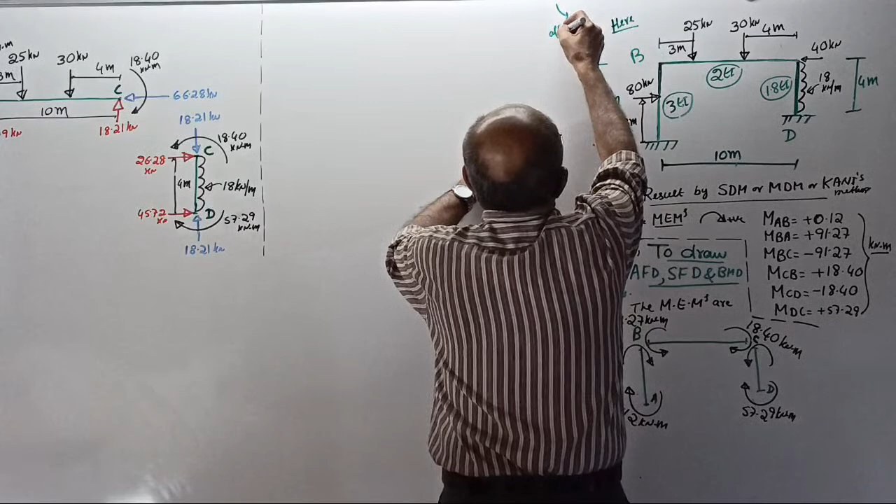See, don't see this side. This is a result I wrote, prepared earlier to save time. You never bother this side now. We are actually here, see, we are here. That is, after analyzing the frame by SD method, MD method and Kani's method, everywhere finally we got member end moments.

Member end moments. Then I wrote what? Then I wrote go to where? If you remember, after getting the end moments, then I wrote what? Go to. What is the usual statement? After getting the member end moment, SD method over, MD method over, Kani's over. Methods are over. Then I write what? Go to. If you remember, after completing every method, what I will write? Moments are over. Go to where? You are not responding. Every time I used to write, different methods are used.

Method will give only member end moments, that's all. Then I told what? Go to. Nodi, you are not answering. You are writing message and deleting. Same time you can use for writing message. Go to where? After getting the member end moments. No, I never write, I give a simple language. SFD BMD, what name did I used to give? No, I used to give a name for you. SFD BMD comes there. Okay, you are telling SFD BMD. I used to give a name. See, just to understand, common part.

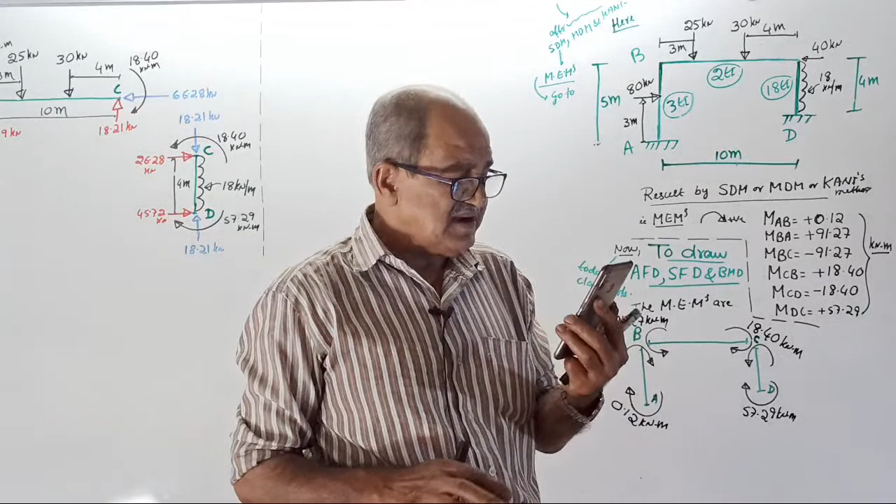You are not following. I used to write, always go to star. Go to star, so our star starts from here. Here, this is not required because already over. This is already over, this is also already over. Okay, start. Now, just to understand.

This is the frame, we that C is missing there. Okay, I don't know why. C. Okay, this is the frame we analyzed by slope deflection method, moment distribution method, and Kani's method. Each and every method will give you final member end moments: MAB, MBA, MBC, MCB, MCD, and MDC. Yes, this is the result. Tell me, this is the result by which method? Result by slope deflection method or moment distribution method or Kani's method.

All the three methods we got same answer. Okay, now up to here, see, this is already over. Now to draw axial force diagram, actually SFD BMD, we will also draw axial force diagram for this frame. That is, today's class starts from here. Now, why I wrote the question once again? Because when I want to find reaction, I should see the frame. If I write a free body, then I would keep on asking you, what is the length, what is the load, etc.

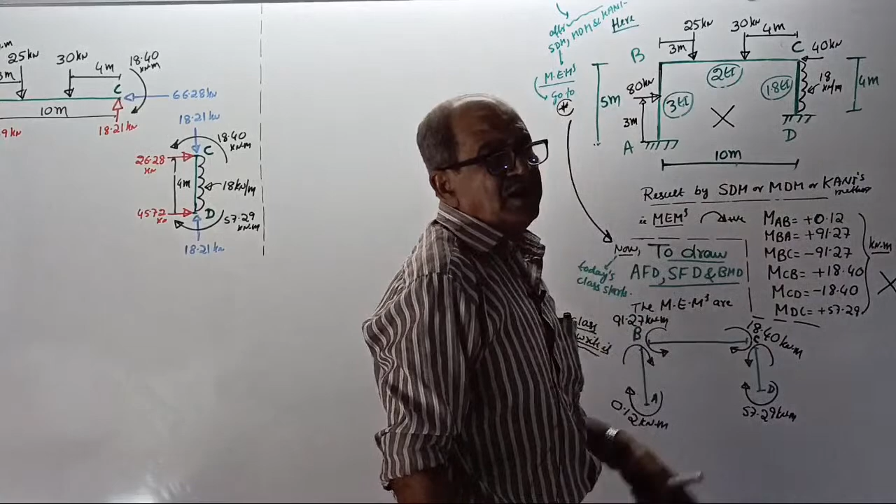I want to understand, I got a confusion for axial force diagram, shear force diagram, bending moment diagram. Those methods are, he may tell, I am expert. Okay, if you are expert, use your expertness and analyze and get the moments. Okay, now clear? Use your expert knowledge and get the moments. Okay, start. Now, nobody can tell, I am not getting the answer. If you are not getting the answer, you have done some mistake.

Okay, now to draw axial force diagram, shear force diagram and BMD, what we will do is, to correct, see, what all I tell you write here. See class, what all I tell you should write if you want to understand. What we will do is, when you go to star part, see our star starts from here. Here, to understand correctly, you draw a line diagram. One member here, small gap, member here and member here, and enter whatever moments you got.

Remember, all these moments are based on sign convention, clockwise. I told you, whatever I tell you should write. Tomorrow you tell, sir, you wrote anticlockwise. Earlier class you told unknown should be taken clockwise, but you wrote anticlockwise. Now it is not unknown. That's why I told, these moments we got by SD, MD and Kani. Now one more thing, completely forget. Now I do not know what is SD method.

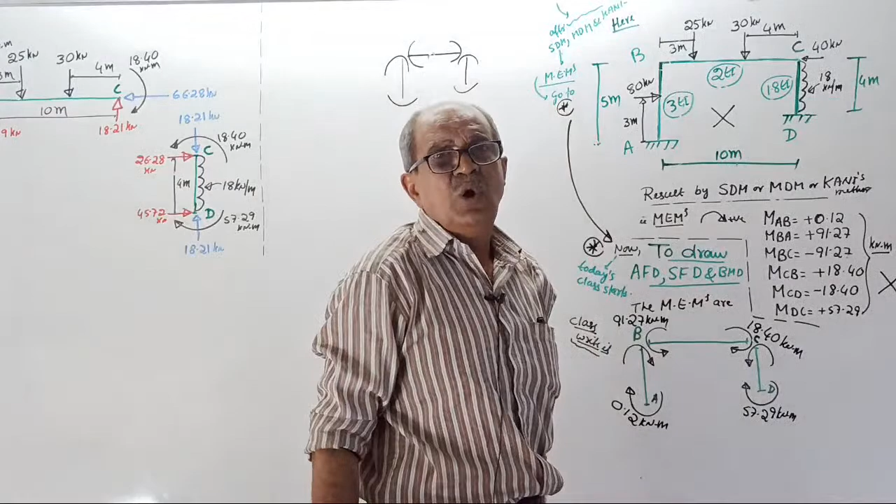I do not know what is MD method or Kani's method. I know only one thing: each and every member will have member end moments, because of fixed supports and rigid joints having moments. Suppose someone gives me these end moments for each and every member. He tells me: now draw the axial force diagram, shear force diagram, and bending moment diagram.

Okay, done. Now these moments we got are based on sign convention, clockwise positive. Therefore, if you write the value as it is with sign, you have to write it as I told in class. If confusion comes, you are responsible. When you enter the moment with this sign convention, you want to write plus 0.12, plus 91.27, minus 91.27, plus 18.4, minus 18.4, plus 57.29 - then in what direction should those moments be entered?

Tell me, if you are going to enter the moments with sign, in what direction should those moments be entered? I will not tell again and again. This I told you earlier. If you are going to enter the moments with sign convention, then compulsorily you have to enter those moments in the clockwise direction. Why? Because as per sign convention, clockwise is positive.

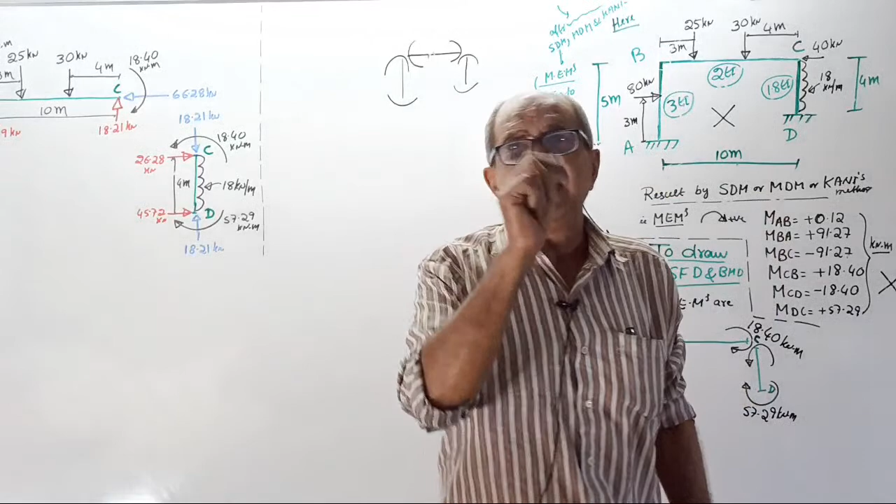Suppose you want to write 91.27, clockwise positive, but negative came. Suppose I want to enter only 91.27 without sign, only the actual direction - no sign, but actual direction. Then this moment and this moment should be entered in what direction? If I am writing only 91.27, no minus sign, then in what direction do I enter 91.27? I will not repeat.

Then for this minus 91.27, if I want to write only 91.27, I should enter it in anti-clockwise direction, no plus minus. Tell me, fully clear? Full clear first. Full clear or not?

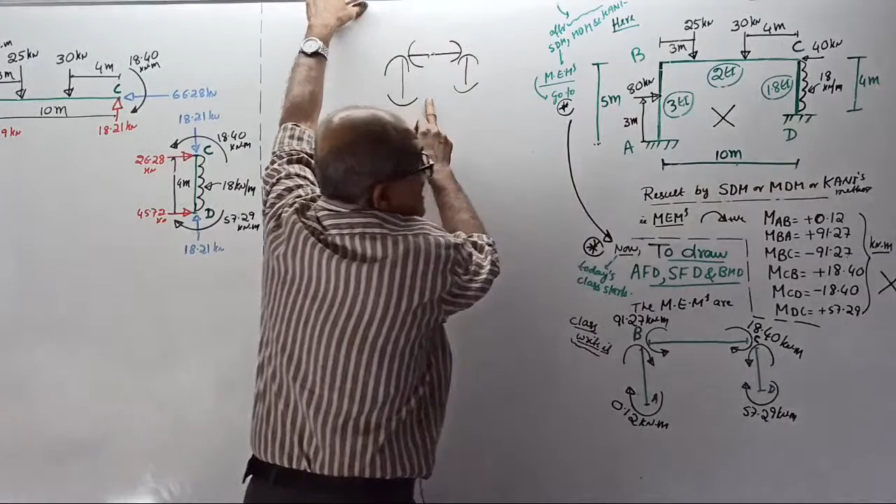This is a major problem for more than 95% of people. I will tell once again: if you are using a sign convention and got the values, then if you are going to enter the result with sign, you should enter it in the direction as per sign convention. Or if you do not want to enter the value with sign, if you want to only enter the numerical value in the actual direction, then anything you got positive, you write the moment without sign in the same direction as sign convention. Anywhere you got negative, you enter the numerical value in a direction opposite to sign convention, without sign.

Clear? This is the last statement, in future I will not tell this again. Go through this 100 times. Clear means okay, second time I told you - later you should not say you weren't told. People who understand should go through my class fully, it's only useful if you do that.

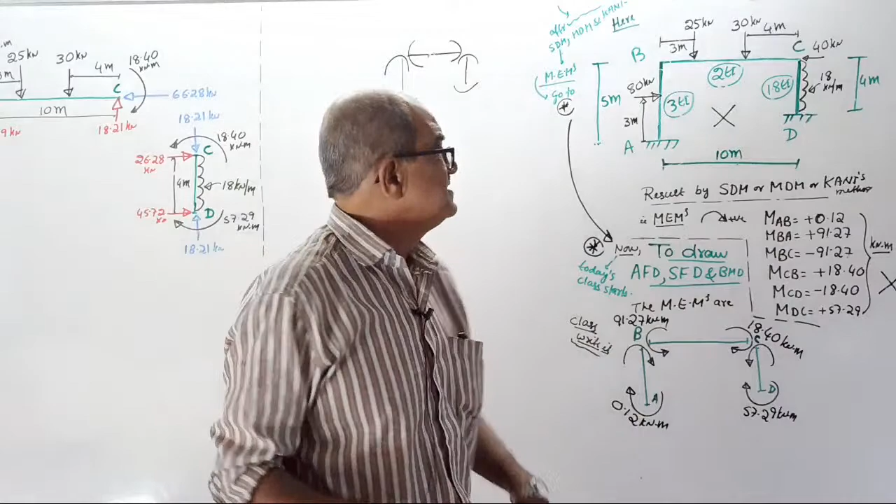Okay, start. Now enter the moment. I entered here - see: plus 0.12, clockwise 0.12. Plus 91.27, clockwise 91.27. Minus 91.27, anti-clockwise 91.27. Plus 18.4, clockwise 18.4. Minus 18.4, anti-clockwise 18.4. Plus 57.29, clockwise 57.29. These are the member end moments. Write a note here: all are in actual directions, no sign, nothing.

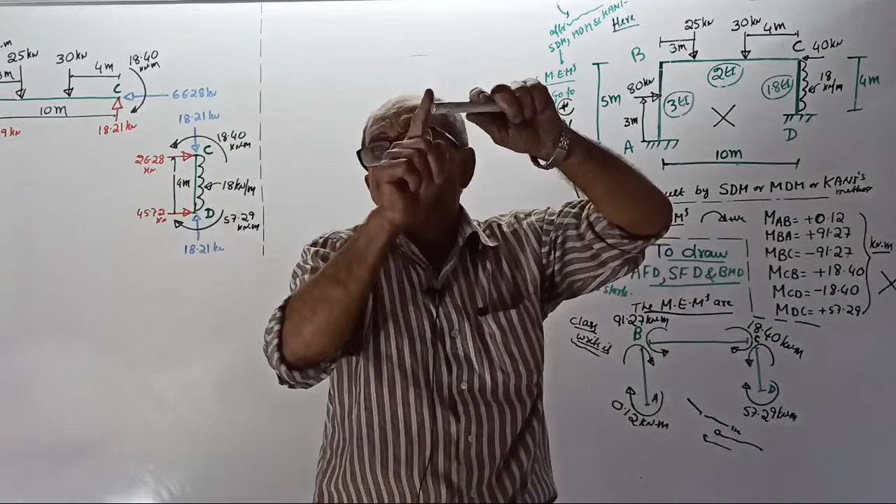Okay, start. Now, to draw the axial force diagram, you require the force along the member. To draw the shear force diagram, you require the forces perpendicular to the member. To draw the bending moment diagram, you want moments and also forces perpendicular to the member. Clear? See correctly, I am telling only one example.

If you do it by software, you get the result. If you want to draw the axial force diagram, you require the forces along the member. If it is a vertical member, I want forces along the member, vertical forces - it will create compression or tension. If I want beam BC, I want along the member: this way is tension, this way is compression.

Same way for CD. If you want the shear force diagram for the beam, you require forces perpendicular to the member. If you want the column shear force diagram, you require this way, horizontal forces. Same here. To draw the bending moment diagram, you require the same as the shear force diagram plus extra moments are required. Clear? Fast, clear? Make this note 10 times.

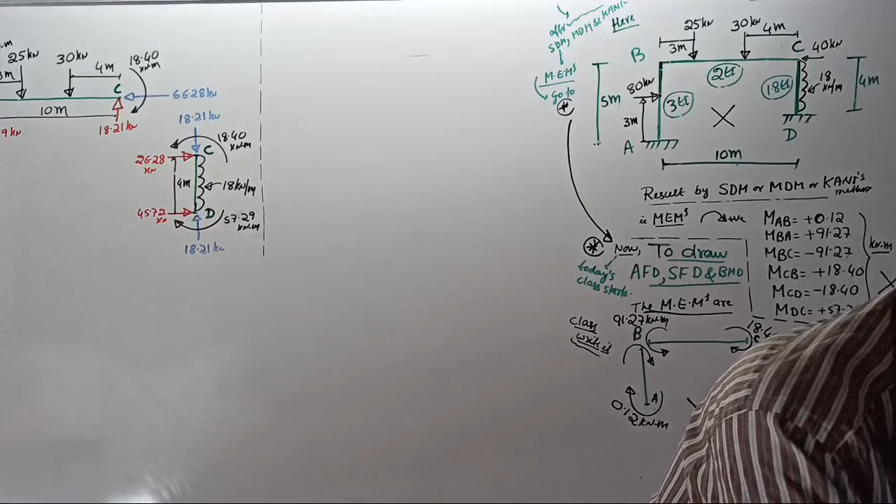You are not saying clear. Okay, clear. See, not answering? I will tell it systematically now. Don't worry, okay, now see.

If you know the member end moments, remember, when you consider the free body of a member, you can only find what? Tell me - if I write the free body of a member using member end moments, using sigma M = 0, sigma V = 0, or sometimes sigma H = 0, from the equilibrium condition using member end moments, you can find only what? Tell me, using the equilibrium condition, if you write the free body diagram for a member, you can find only which one? Tell me, you can find only what?

Only horizontal force or horizontal reaction or vertical reaction. Tell fast. If you write free body of a member, apply equilibrium condition, you can find only horizontal forces or vertical forces. Fast. Reactions, okay. Horizontal reactions or vertical reactions. Fast answer. You should answer fast.

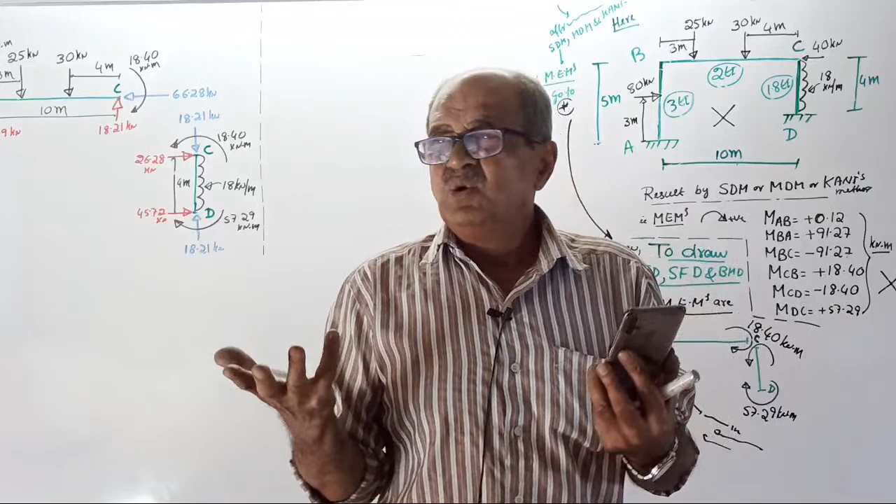Don't delay unnecessary, hours together. See, usual problem, no reply, nothing. Then why am I asking the question? When there is no answer, I have to keep waiting for the answer. Then it will become like last time's class. I may close the class and go. I will record. See, I asked you two times. Third time I cannot ask. Sorry, I asked two times. Third time I can't ask. Sorry, not asking. No, not asking, asked two times.

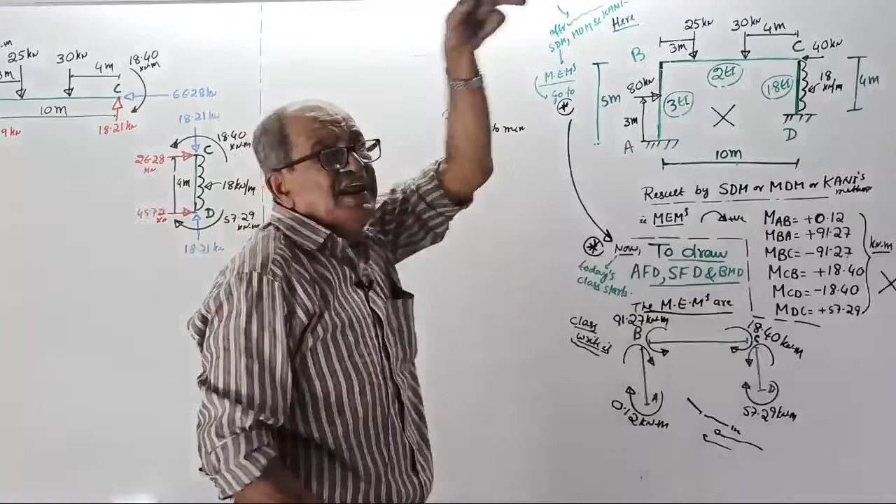Okay, I will tell the answer. If you sketch the free body diagram of any member and you enter the member end moment and reactions for the member, then using equilibrium condition, you can find only reactions normal to member. That is, those reactions which have shearing effect and bending effect. No axial forces. Because if I take a member here, for example, if axial force is here, one reaction here, two unknowns are there. You can't solve it.

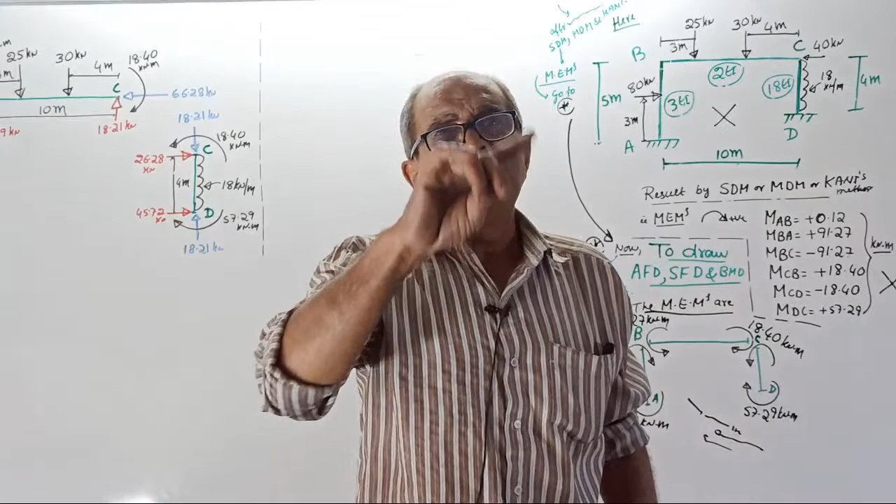So, if you consider free body diagram for a member, you can get the result or reaction which are used for which one? Tell me. Axial force diagram or SFD BMD. By considering free body diagram of each member, what reactions are you getting? You will get those reactions which are used for what? Either axial force diagram or SFD BMD together. Which one? Tell me. Two groups. One is axial force. SFD BMD together, which one? SFD BMD. So, if you want axial force, you require some extra concept, I will tell. So therefore, right here, first what you do is, first consider free body of all 3 members.

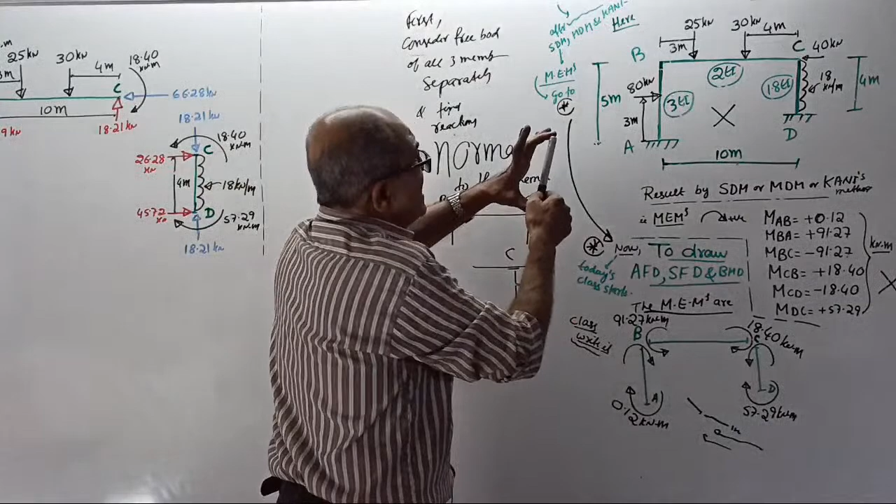Separately, and find what? Reactions normal to those members. That is, if I take the AB member, find this reaction. If I take BC member, find this reaction. If I take CD member, find this reaction. Direction I will tell later. Clear? For AB, this reaction, not axial. Axial will not come. For reaction, I told normal to member. For AB, get this reaction. For BC, get this reaction. CD, get this reaction. Clear?

Fast. Okay, start. First you do it. But remember, direction of reaction, if clear for you, 100% guaranteed, assume in the correct direction. If you are 100% sure, assume correct direction. In case doubt comes, what to do? Direction of reaction, in case doubt comes, what to do? Suppose doubt comes, horizontal reaction, right side or left side. Doubt, don't see SDM, MDM, Kani now.

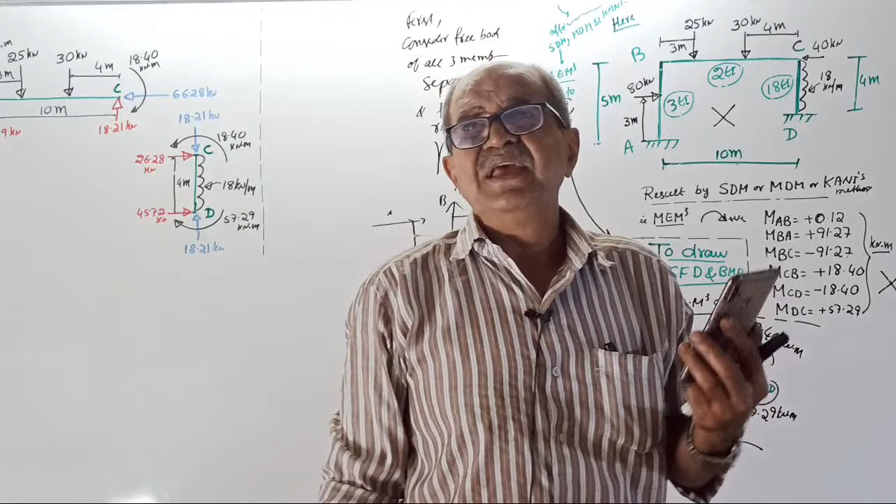You do not know SDM, MDM, Kani. We are actually in engineering mechanics. Remember, we are in engineering mechanics. Tell me, if direction is confusion, what do you do? Tell me what to do. If directions are confusing, suppose you are not able to decide direction. For example, horizontal reaction here. Doubt comes, right side or left side. Doubt comes, what to do?

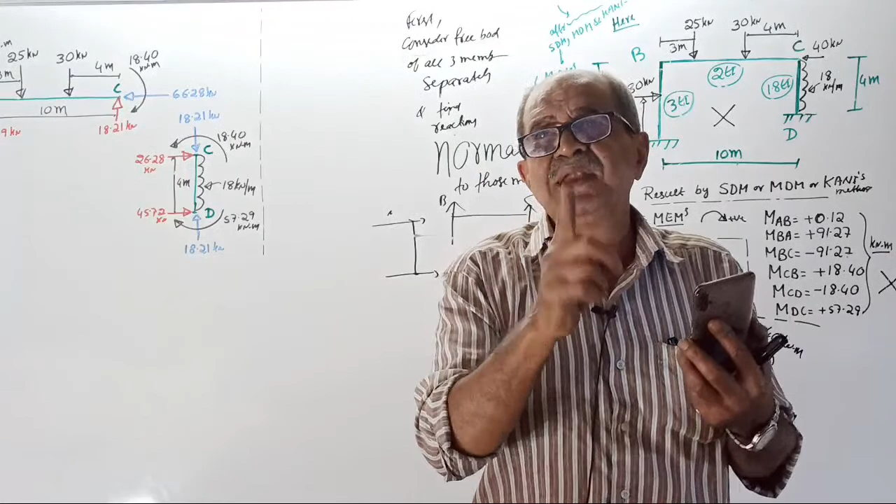Assume some direction. When you solve, use any sign. If it comes positive, assume direction is correct. If it comes negative, assume direction is wrong. So, if you get positive, next time when you go to free body, enter the value in the same direction as assumed. If you get negative, later enter the value without sign but in a direction opposite to the assumed direction. Clear? See, structural engineering has got lot of mathematical concept.

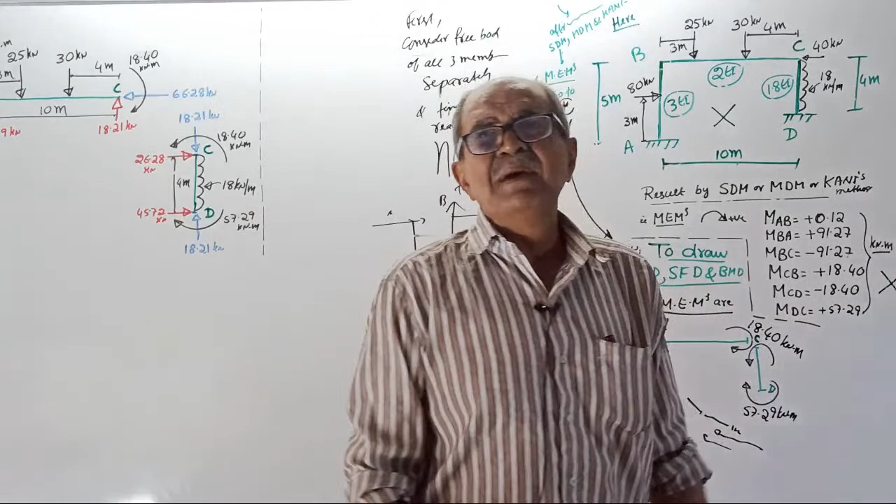Lot of concept, so much of mathematical concept. So many people, I will tell you, it is not 95%. I am guaranteed, if I have to trap someone, I have got confidence. I can trap 99.99999% people, I am sure. Maybe, sorry for having so much confidence. My confidence, if you bring 1,000 people, I am sure 999 people I can trap. Maybe one, okay, he may be equally competent. With him I will tell, oh you got beautiful concept. Sorry, we are friends, I will tell him that way. Sometime I will tell, no more testing you, you got perfect knowledge, therefore we are friends. Leave it, you are not in the group. Others all, I can easily trap. Ask some questions seriously, one after another. See how they will fall to the trap. Okay, start. Not for boosting myself, I told, because it is a reality. It is a reality, do you agree? It is a reality that majority, more than 99.99% got confusion, they are open for trapping. Whether you agree or not, it is a reality. Okay, start, now first step.

Calculation of reactions, normal to members. Very, very important: members for AB, BC and CD.

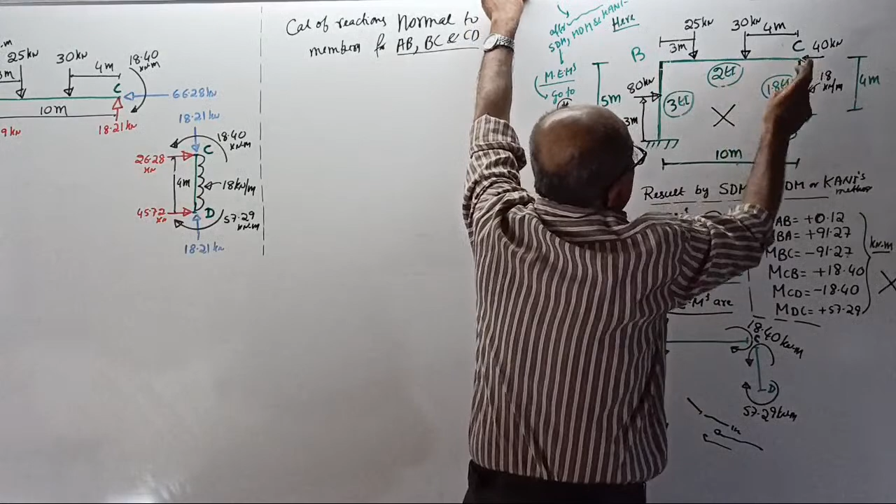Remember, here AB is supported by BC, and BC is supported by AB on one side and by CD on the other. Beam BC is supported left side by column BA, right side by column CD, with contact points B and C. Do you agree?

Okay, start. First I'll consider AB. I'll write the free body for AB. This is A, this is B. There is a point load here of 80 kilonewton at 3 meters from here.

Then further, there is a fixed support. Since the load is going this way, the likely chance is, with assumption, when you apply load here, the reaction will come like this.

HA. You should not take the right side. And if you apply load this way, the likely chance is that reactions are like this: HA and HB. Tell me.

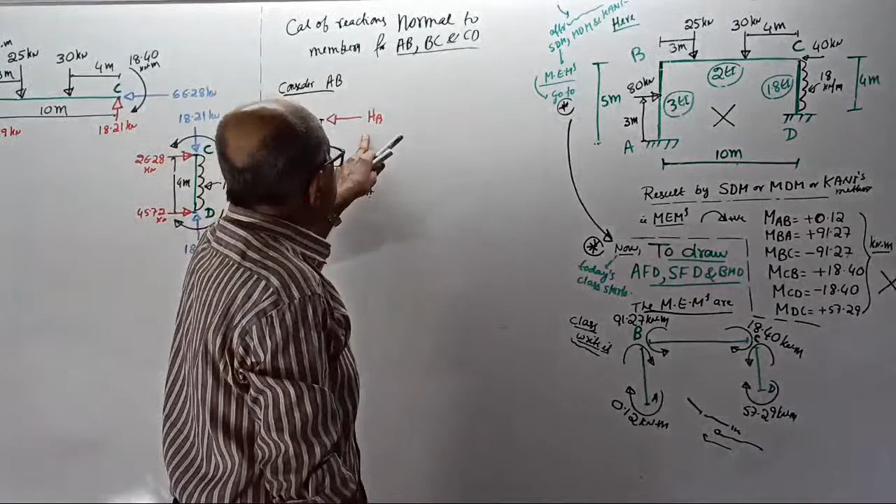This HA is coming from the fixed support. This HB is coming from where? Tell me, from which member is HB coming?

BC. So if you want, I will put H for BC, H for BA, correct? Now I will call it H for BA. Okay, this is HA only.

Now also there are member end moments. Also there will be vertical reactions, but we are not bothered about those now. Most probably the reaction will come like this here, VA, and here from the beam a downward reaction load will come, maybe VBA. You don't worry about it now, because when you take moment, VBA and VA are not there. But very important, moments are there.

At A, clockwise moment of 0.12 kilonewton meter. At B, once again, clockwise moment of 91.27 kilonewton meter.

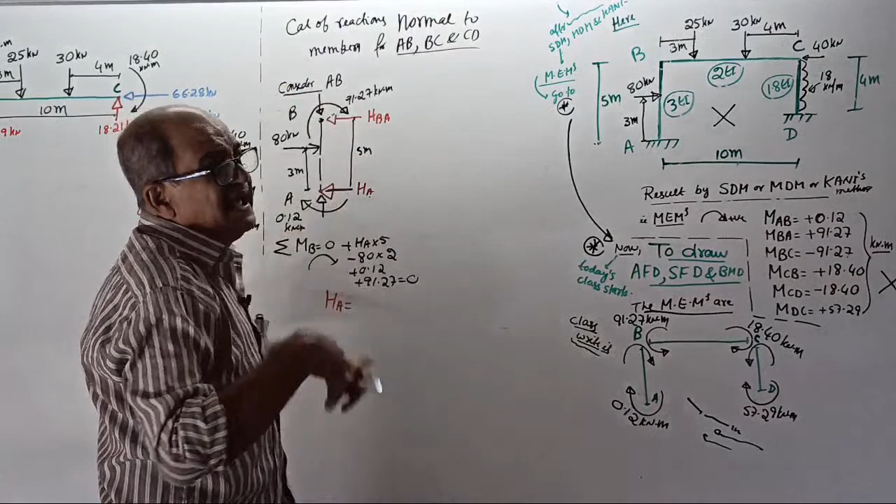Answer: give the answer with sign. Whenever you find something based on sign convention, remember, you always write the answer with sign. Plus 13.72. Congratulations, it is plus 13.72 kilonewton. Okay, then sigma H equal to 0.

Take right side positive. Minus HA, minus HBA, then plus 80, equal to 0. That's all.

You know the value of HA. Substitute for HA and tell me what value of HBA you are getting. Fast, with sign.

Plus the answer, HBA. Reaction at B for the BA member.

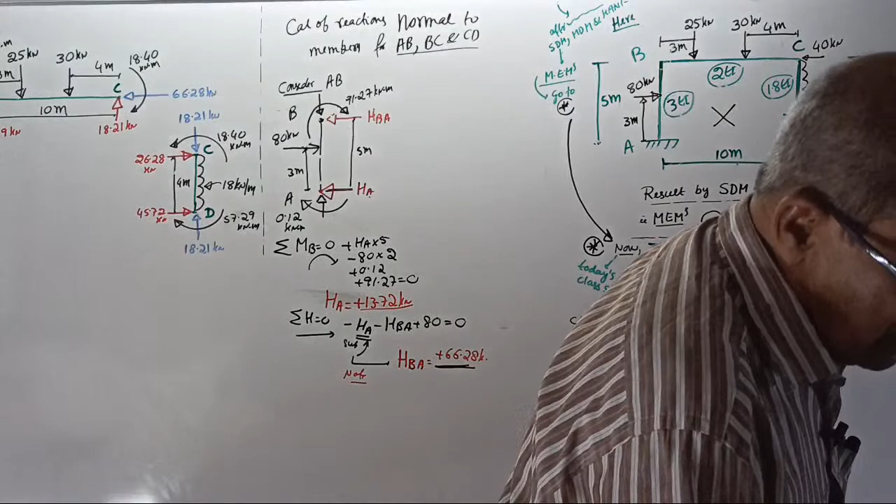Fast, clear or not? Clear. By chance, if you get a negative sign anywhere, then when I enter it later, I will enter it without the sign, in a direction opposite to the assumed direction. Okay, next, consider BC.

Consider BC. BC is here. There is a point load of 25 kilonewton, one more point load of 30 kilonewton, and there is a reaction here, and a reaction here. This is reaction at point B, this is C. Reaction at B is the vertical reaction for BC, vertical reaction at C for CB. Then there will be some horizontal reaction.

We are not interested, because you cannot get it. If you apply sigma m, sigma v, you get it. Suppose you apply sigma h, two unknowns are there. Axial force you have to get using a trick later. So these are not required for us at this time. Anyway, when you take moment, it has no effect. There is an anti-clockwise moment of 91.27 kilonewton meter, a clockwise moment of 18.40 kilonewton meter. Remember that 40 kilonewton is acting externally from outside, don't consider it. Okay, start.

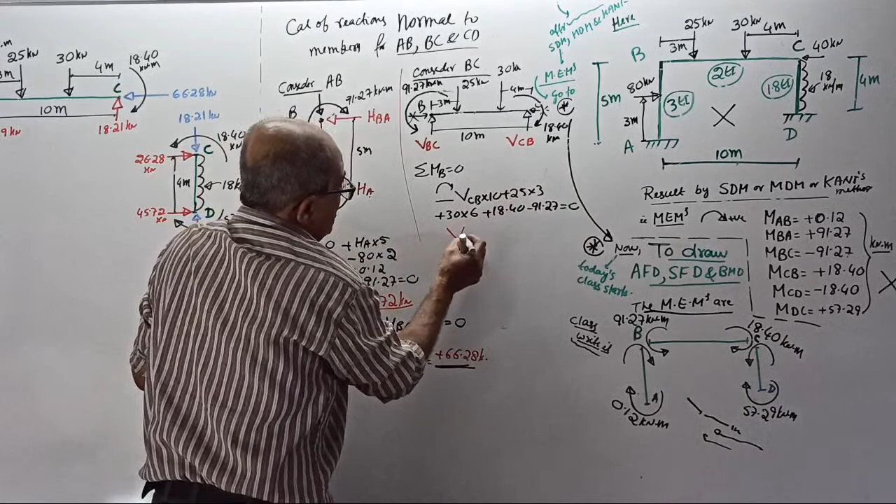Length of member is 10 meter. This is 3 meter, this is 4 meter. So if I take moment about B, clockwise positive, I will get minus vertical reaction VCB into 10, plus 25 into 3, plus 30 into 6, then plus 18.4 minus 91.27 equal to 0. Tell me what is the value of VCB you will get, with sign, in kilonewton.

Answer: I told you, when you apply sigma m0, sigma v0, you can find only the reaction normal to the member. For a column, you can get horizontal reaction. For a beam, you will get vertical reaction. Answer: VCB.

A little past, I want second decimal accuracy, which is sufficient. So therefore, lastly, while balancing, some 0.01 difference is not a problem. Plus 18.21. Thank you, plus 18.21.

Sigma V equal to 0, upward positive. You get plus VBC plus VCB minus 25 minus 30 equal to 0. You know the VCB value, therefore you get the value of VBC. Answer, fast, plus.

We get what? You get VBC. VBC will come plus 36.79 kilonewton. Correct or not? Plus 36.79, correct answer? Tell me, correct or not?

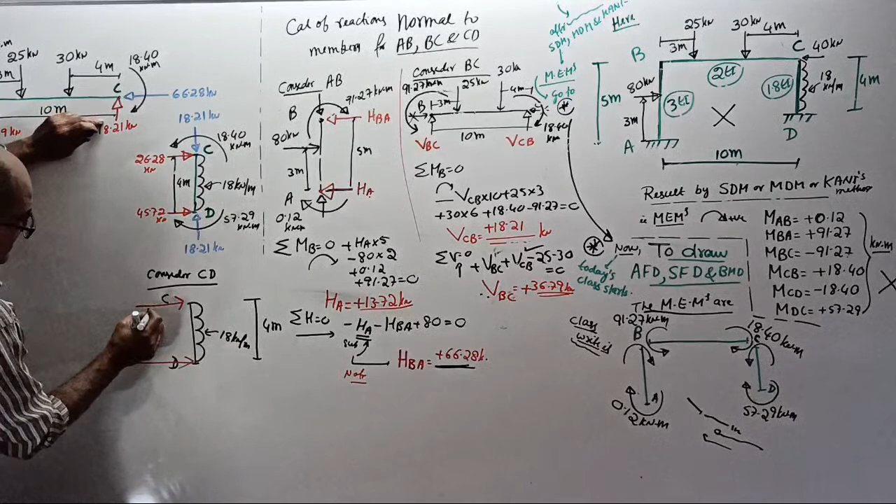Now, because the load is this way, every chance is that horizontal reaction will be like this. I will assume like this: HC and HD, this is HCD. SCD, okay. Now there will be a vertical reaction, we don't require it. Then there is a moment here, anti-clockwise, of 18.40 kilonewton meter, a clockwise moment here of 57.29 kilonewton meter.

Okay, now sigma m about any point will do. I will take moment about C. About C equal to 0, take clockwise positive: minus HD into 4, plus 18 into 4 is the total load into 4 by 2 clockwise, that's all, plus 57.29 minus 18.40 equal to 0. You get the value of HD.

Tell the answer, you get the value of HD in kilonewton. Fast, you get the value of HD in kilonewton. A little fast you have to give the answer, you are wasting a lot of time. That's why now in later courses, all basic courses, I decided it's better to go for recording only, where time is not wasted. Live class means what? You are participating, but a lot of time is wasted because there is no response.

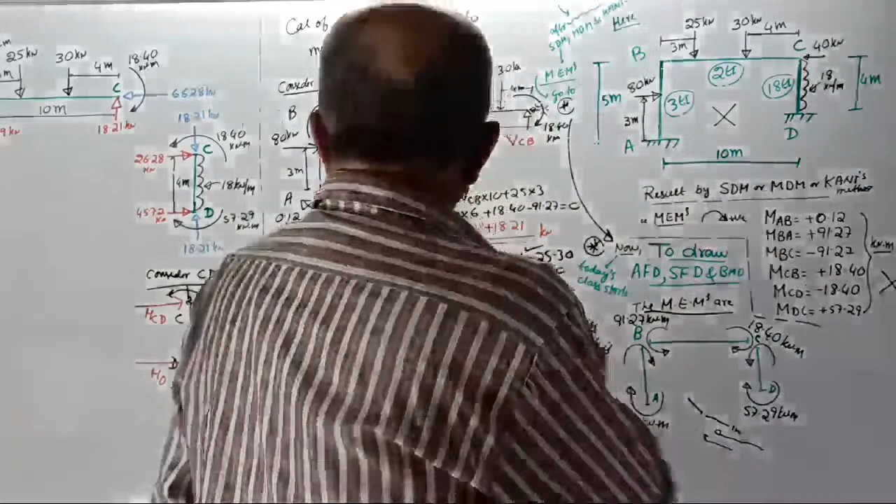When I write everything: plus 45.72, plus 45.72 kilonewton. Okay, then make sigma h equal to 0, not sigma v.

Right side positive, then plus HD plus HCD minus 18 into 4, the total load, equal to 0. Therefore, you get the value of HCD. Oh, last answer, over. Answer: now I will tell you how to write the free body diagram. Answer, HCD.

Calculations over. Now only tricks are there. If you tell HCD, my work is over.

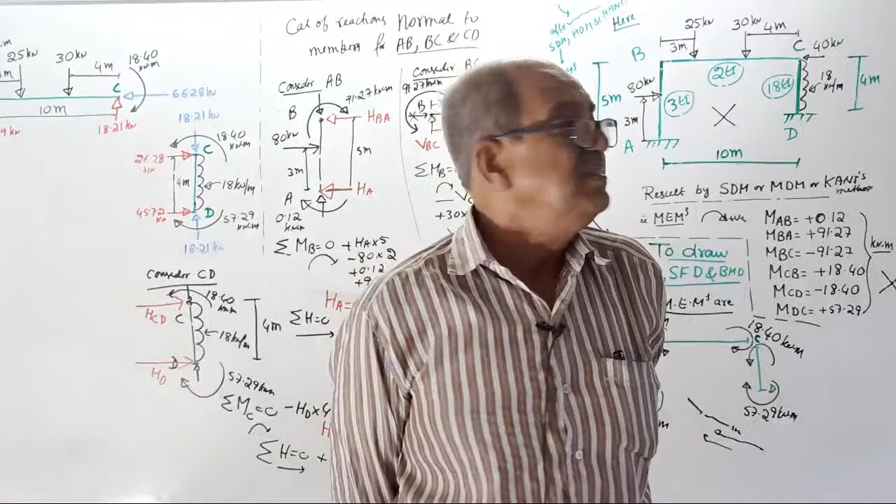Yes, now that's all. We can go to axial force diagram, shearing force diagram, and bending moment diagram. But remember, there is a problem. The data we got so far, is it sufficient for shearing force diagram? Is the data we got sufficient reactions? Is it sufficient for SFD and BMD? Tell me, what reactions we got? Is it sufficient for SFD BMD? For SFD BMD, we want forces perpendicular to member and moments.

Yes, but this data, what we got so far, is not sufficient for what? Tell me, you need extra information if you want what? If the purpose is only SFD BMD, work is over. But it is not sufficient. If you want to draw axial force diagram, remember that I will tell the trick. What all I tell, you practice 100 times.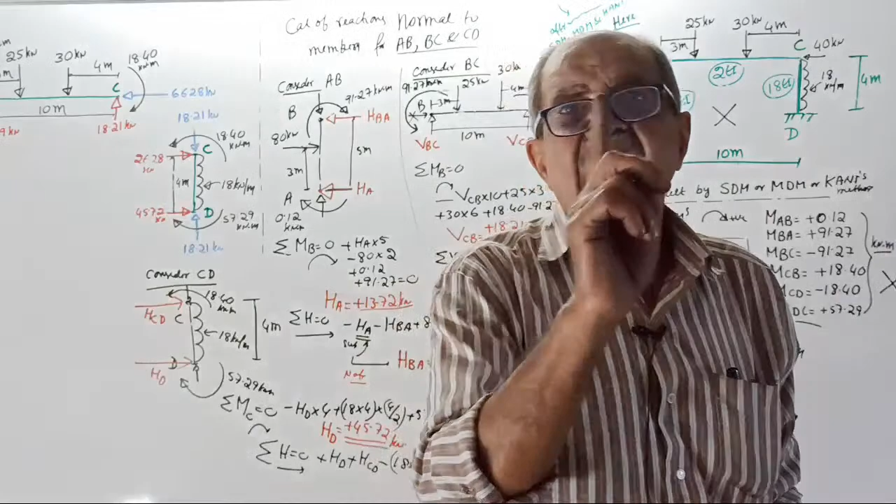Okay, leave it. Now I will tell you one thing. I am rubbing everything now. Actually, I can remove this one, correct? This result I will remove, not required. See, I will tell you one thing now. Okay, better, momentarily.

I will tell one thing. Little later, I am going for free body diagram, free body diagram. At that time, what I will do is, when I consider AB,

I will enter HA this way. How much, HA? No, HA like that, numerical value: HA, 13.72.

Top reaction, this way HBA, I will enter 66.28. Okay, then when I consider BC member, I will enter this reaction to 36.79. And this reaction, I will enter 18.21.

And later, when I consider CD member, I will enter bottom reaction right side of 45.72. Top I will enter 26.28. Because I am rubbing everything, correct?

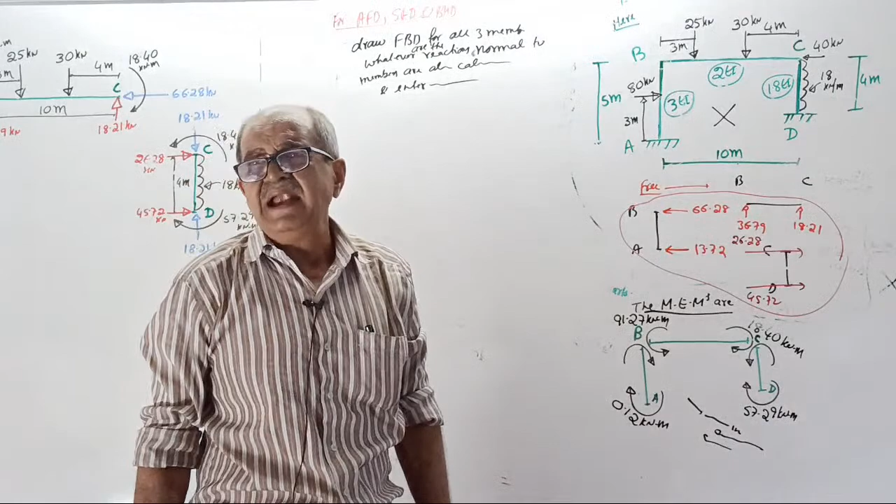Whatever reactions, that is reactions normal to members, or whatever are the reactions are already calculated, therefore enter them. Wherever positive came, enter in the same direction as assumed. In case you get negative, enter in the reverse direction, no negative sign. Also enter member end moments and loading and distances.

Okay, one minute now. See, AB member. I'll write here. Some gap required for me. This is BC member. This is CD member. Separately A, B. BC, CD.

AB member, there is a point load here of 80 kilonewton at 3 meter. Member is 5 meter. BC member, 2 point loads 25 kilonewton and 30 kilonewton at 3 meter here and 4 meter here. Span is 10 meter. CD member, UDL of 18 kilonewton per meter, and this is a 4 meter member.

Now for AB, I got reaction this way of 13.72 kilonewton. Here, this way reaction of 66.28 kilonewton. For BC member, I got this way reaction of 36.79 kilonewton. This way reaction of 18.21 kilonewton. For CD, I got this way reaction of 26.28 kilonewton. Here reaction this way of 45.72 kilonewton.

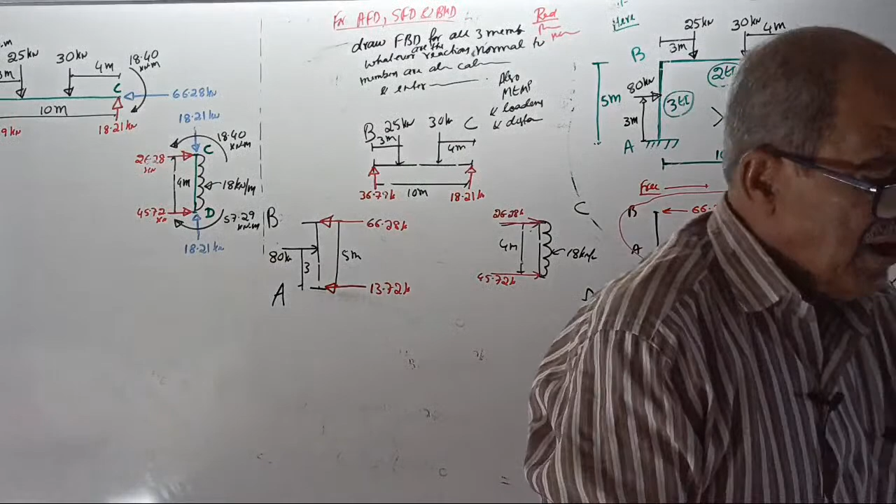Then member end moments already over, it is not unknown, I will use black color. Clockwise moment of 0.12 kilonewton meter. Clockwise moment of 91.27 kilonewton meter. Randomly I am writing anti-clockwise of 91.27 kilonewton meter. Clockwise of 18.4 kilonewton meter. Anti-clockwise of 18.4 kilonewton meter. Clockwise of 57.29 kilonewton. Okay.

Now, lastly, I want what? Those reactions which are axially passing. Tell purpose: that is, for the column, I want vertical reaction for the columns. For the beam, I want horizontal reaction. Tell me, purpose. See, this much data is sufficient to draw SFD BMD.

Make a note, you take a screenshot and tell. This much data is sufficient to draw SFD BMD. But I also have to draw axial force diagram. For that, I need for columns, vertical member, the force along the member, vertical reaction. For horizontal member, horizontal forces.

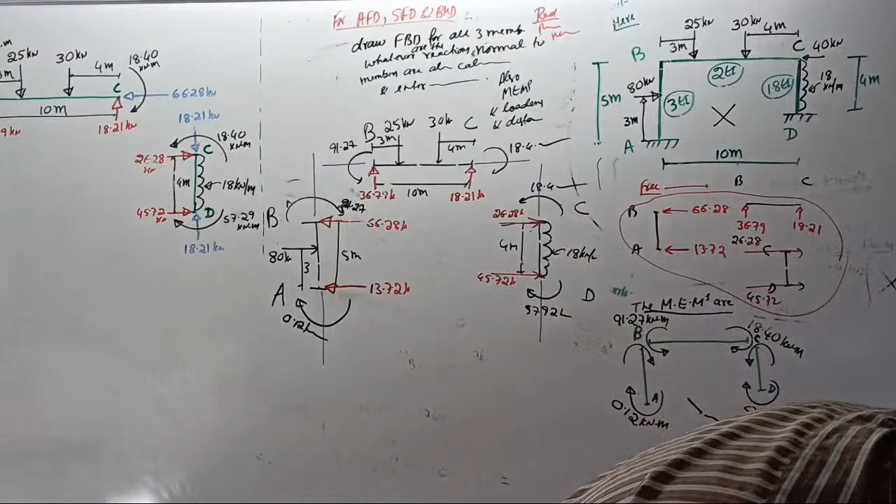Axial force diagram will give you for a column. It's very important. When you design a column, axial force is the most important term. Why? Axial force is the most important for column, but for beams it is not required. But we will draw it anyway. In structural analysis, we never bother with importance, we draw everything. Practically, for column, axial force is most important.

Okay, now correctly see what I am doing. These reacting forces along the member, you have to decide by inspection. See what I am going to do, one minute.

Start from joint B. For beam BC, there is a vertically upward reaction of 36.79. This is first, number 1. I am starting from here. For the beam, what all I am going to tell you, you have to write again and again. Practice, I will tell only once.

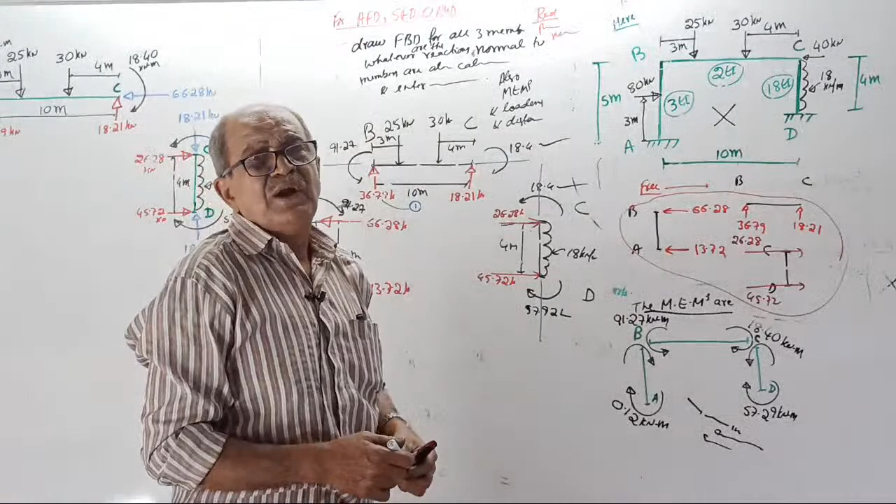Because later everything is entered, you should go through the class again and again. Start from here. For the beam, there is a vertical reaction of 36.79 up. That is the reaction for the beam from the column. 100% from the beam for the column, tell the vertical load transferred, tell the answer. 100%, from the column to the beam, there is a vertical reaction of 36.79 up.

So from the beam to the column, for joint equilibrium, what is the load transferred from beam to column? Answer - you are again not answering. What is the load transferred from beam to the column? Same magnitude in opposite direction. So from beam to the column there will be a downward load of 36.79 kilonewton. Remember how you got it - this one reversed.

Fully clear or not? You should go through the class again and again. Full clear? Okay, now same way, come here. This is number 2. For the beam from the column, there is a vertical reaction upwards of 18.21, means from the beam to the column, 100% there is a downward reaction or load transfer of 18.21. Direct answer, this is based on this one. This also clear? Okay, now do one thing.

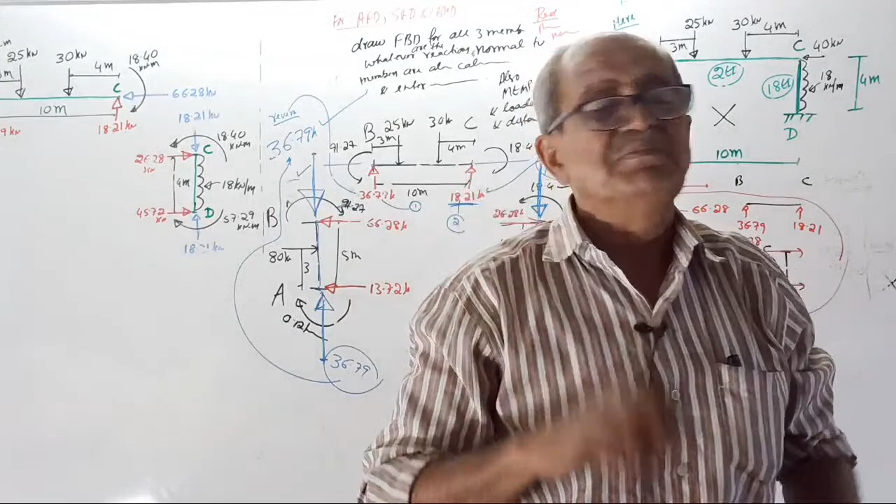Now we got axial forces for the column. Once you get the reactions for the beam, once you get the vertical reaction for the beam, when you reverse it, you get axial forces for the column. Clear or not? Fast, tell me, clear or not? Don't waste time, till diagram you have to draw. Clear. Okay, now only pending is axial force for the beam.

Start, come here. There is a force of 66.28 to the left side. This is the force on column B from the beam, or relative force. Tell me, for equilibrium for the joint, if it is 66.28, tell me what is this force? If it is 66.28 for the column from the beam, from there, if you can imagine for the column from the beam a force of 66.28 is coming, means from the column to the beam, what will go there? Tell me.

Same 66.28 to the right side. It is 66.28 right side. This we got by seeing this answer. Correct? By seeing this answer. Clear or not? Okay, now consider the beam.

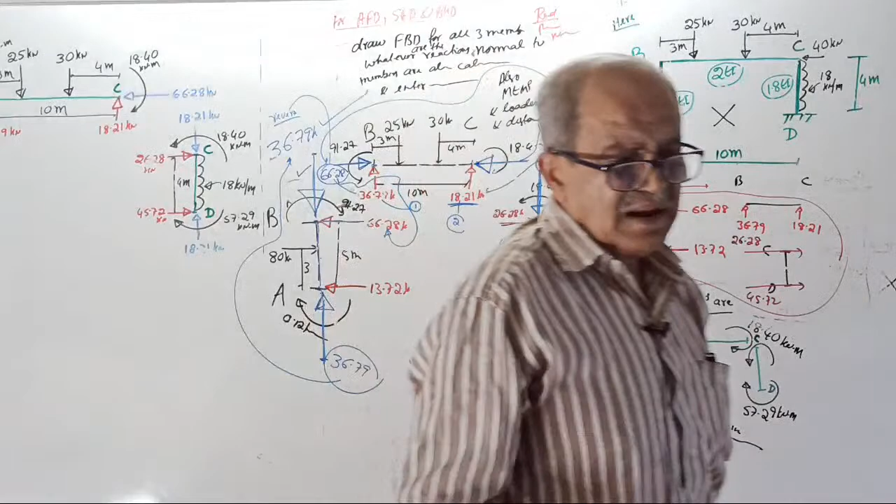By seeing this answer, over. Now, full clear, tell me. Full clear, everywhere we got reaction. Full clear, free body. Okay, now I wrote roughly here.

Tell me why, because so much things I told. This is using that one. I wrote roughly because neatly the entry is somewhere there. I'll show you, very beautifully I entered there.

Okay, now one small concept. Let me see this question, this concept. I am uploading it on YouTube under a special name. I am challenging everybody, people who have structural knowledge, to answer the question. Now, 1 minute, just see joint C.

There is a left side force, if I see joint C here, a left force of 18.4, and a right side force of 18.4 at joint C. If I write joint C here, there is a left side force of 66.28 and a right side force of 26.28. Therefore, is the joint C in equilibrium?

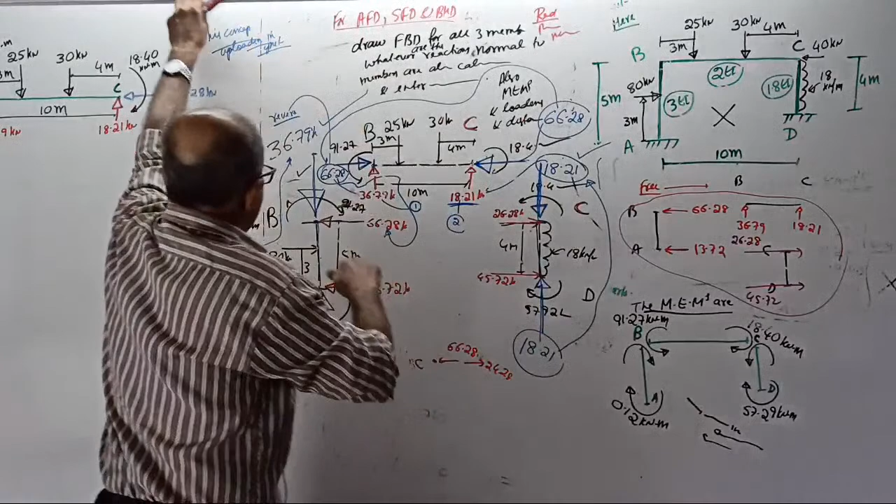See here. Clockwise 91.27, anti-clockwise 91.27, equilibrium. Clockwise 18.4, anti-clockwise 18.4, equilibrium. Down 36.79, up 36.79, equilibrium. Up 18.21, down 18.21, equilibrium. Left 66.28, right 66.28, equilibrium.

But left of 66.28 and right of 26.28. Tell me, is it in equilibrium? Tell me, answer, is it in equilibrium?

No, tell me, is it in equilibrium now, at present? I told everything once again. Why should I repeat? I told everything so far. Is it in equilibrium? No. There is a net force of how much?

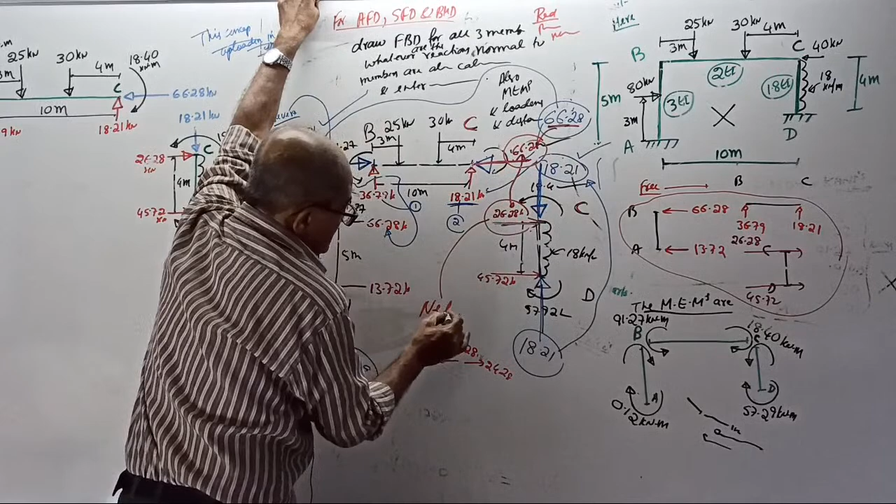66.28 left side, 26.28 right side. So these two will have a net force of how much? Net horizontal force of how much? Tell me. 66.28 left side and 26.28 right side. There is a net horizontal force of how much?

40 to what side? How? See correctly. 66.28 to left side, 26.28 to right side. So net horizontal force of 40 to left side. To left side.

Oh, there is a problem. From outside, there is a joint force of how much? Tell me. Now see the frame. From outside, there is a joint force of 40 left.

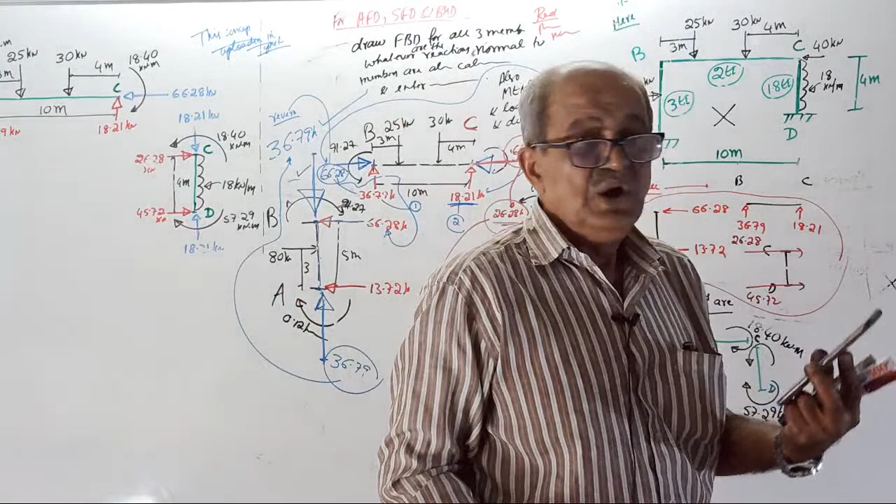Here also net force of 40 left. So net answer, internally 40 left, externally 40 left. Total: all this is 40 left, externally 40 left, total 80 left.

Is it possible? Tell me. I am sitting here now. You can't see me, because if you see me, you will see how I am laughing. So I don't want to laugh in front of you. See, my face expression will change. Better I sit here. Looks very odd or not?

Externally applying 40, internally also 40, same way. Is equilibrium there? Is equilibrium there? First, tell me whatever comes to your mind. Is equilibrium there or not? Again see, you are at present no.

Looks very odd. See, if externally there is a 40 to left side, internally 40 should be what, to left or right side? From externally, if 40 is to left, internally 40 should be to what side? When externally 40 is to left side, internally 40 should be to right side.

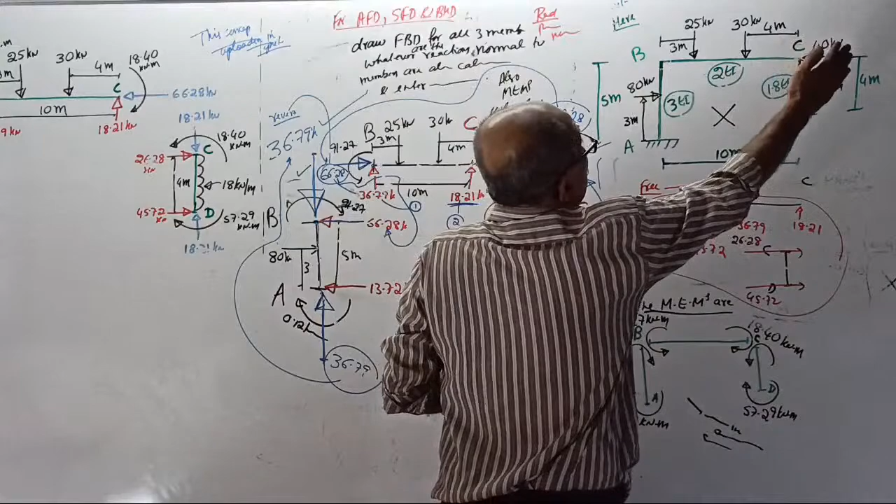But unfortunately, externally 40 this way, here also 40 same way. It will add up and spoil the equilibrium. Yes or no? Equilibrium is spoiled. Tell yes or no? Equilibrium is spoiled, looks very funny.

But the number tallied, see, I got 40 only. Yes. My answer: no, equilibrium is not spoiled. It is perfectly correct. I am going to ask this question on YouTube for the people who think they know too much of basics. I will tell them, come on, answer the question. Come on, answer the question.

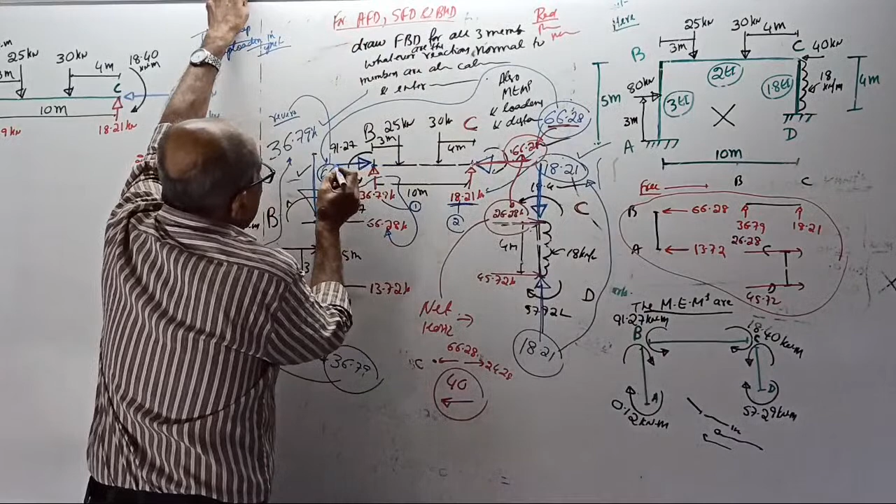Okay, anyway, for the time being, you believe me. Agreed? Right now, do not bother about it. See, once you get 66.28 here, you write the same answer here, and believe me, it is in equilibrium. Will you believe me? If I tell you it looks like not in equilibrium, but I will tell you this way: it looks like not in equilibrium, but I am telling you it is in equilibrium.

Will you believe me? Tell me. Will you believe me or not? I am telling you it looks like not equilibrium, but it is in equilibrium. Yes. One person, I don't want to tell, from the past 2 years, he is at a high level.

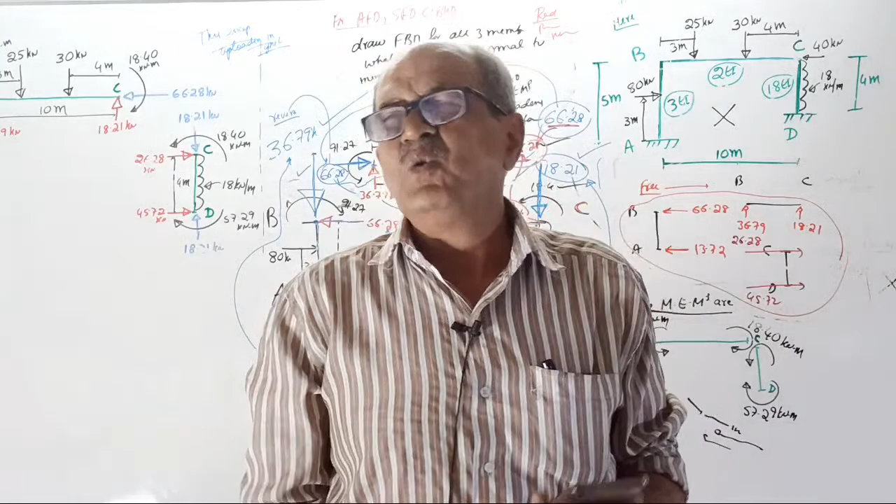He is struggling to give one of the answers for this one. Whatever he tells, I will give another way to answer. First he told me, sir, give me 24 hours time. Then I told him, not 24 hours, I will give 24 days for you. He told, not required, 24 hours is sufficient, I will get the answer. I told, okay, you can get the answer, but anyway from my side, take 24 days. Such 24 days has become nearly 2.5 years now.

Still I think he is struggling, scratching his head. What is happening here? Confusion. But I told him, I will not tell the answer. He told, no, within 1 day I will get it. That 1 day gone, now it is more than years together.

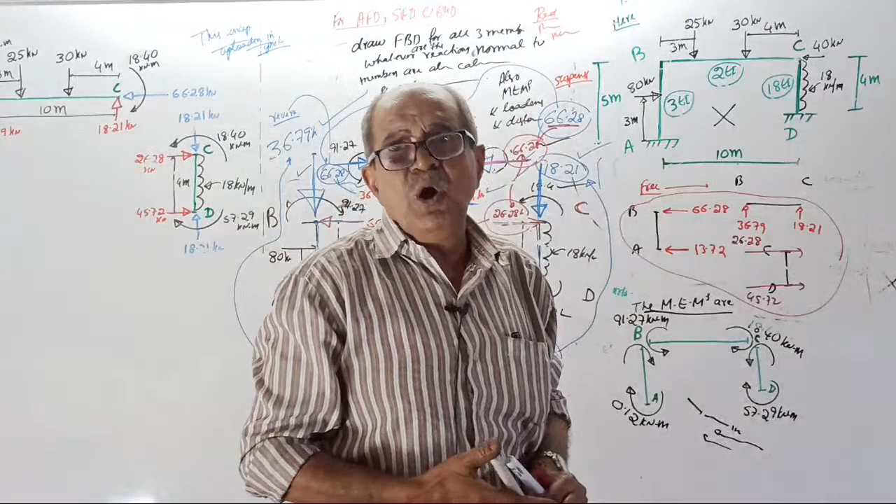Okay, leave it. At this point, I am not explaining it to you, one suspense for you, no problem. It will be uploaded on YouTube with the solution.

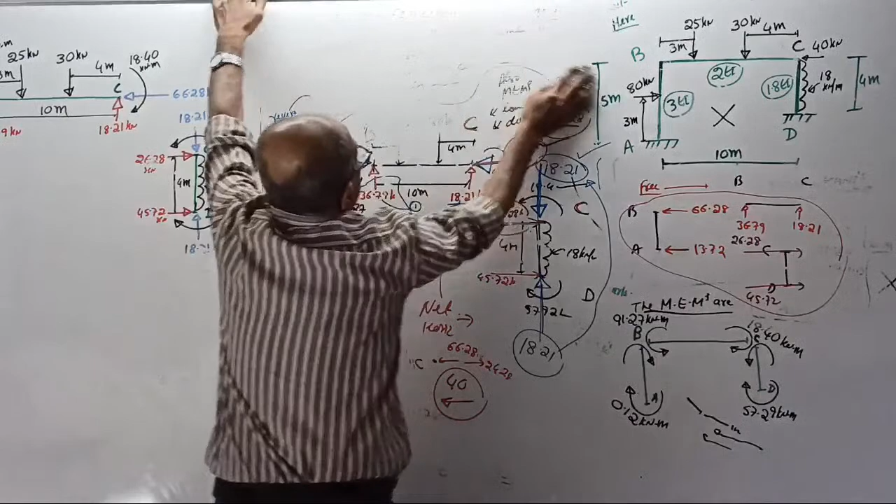Full gone. Now see, I will draw all the diagrams. I will tell you something else also now. Note, I am not removing the frame. For some reason, the frame I am not removing.

Okay see, remember, finally we got the vertical reaction by transferring. Yes or no? By transferring, we got the vertical reaction for the column. Correct? Now I will tell you one thing before you proceed.

Suppose you consider this, this is unwanted, only for information. Fast, give the answer, class will go a little more time. Suppose I consider only the free body of CD and take moment about C equal to 0.

See here, if I take the reaction like this, then minus HD into 4, then plus 18 into 4 by 2. This moment is clockwise of 57.29. This moment is anti-clockwise of 18.4, equal to 0. HD will come out to plus 45.72. This is already clear, so HD equal to 45.72 kilonewton. Tell me, clear or not?

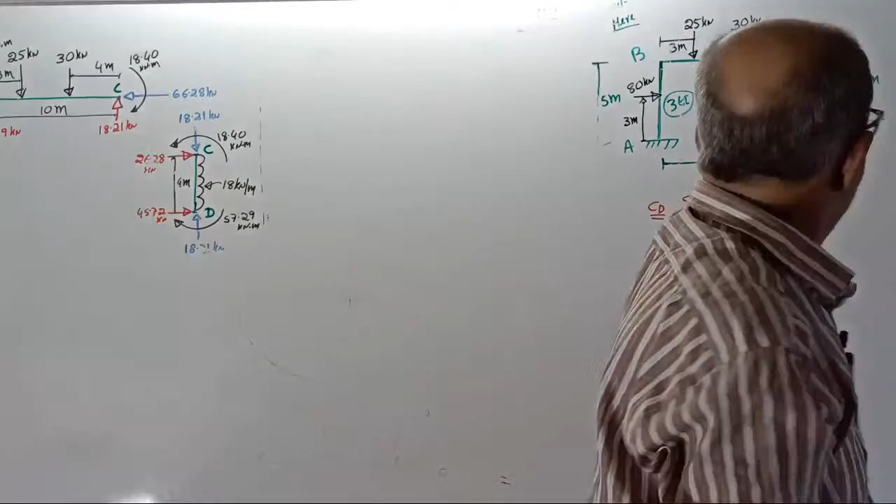Okay, now I got the vertical reaction here. How did I get it? This vertical reaction VD, I got by transferring. I can do one thing.

Consider the free body of B, C and D. This unwanted free body, you consider. Then this moment will not be there because this moment will cancel. Yes or no? If I consider the free body of B, C, D, this moment will cancel. Tell me yes or no, those moments will cancel.

And of course, there will be a moment here, anti-clockwise of 91.27. Now do one thing, take moment about C, take clockwise positive. Minus HD into 4.

Then minus VD into 5, 10. Minus VD into 10, plus its moment, plus this moment, that moment is 57.29. And then plus clockwise 18 into 4, the total load about this point, if I take moment into 4 by 2, this has no moment. Plus 30 into 6, plus 25 into 3, minus 91.27 equal to 0. HD we already got as plus 45.72. Tell me what VD will come.

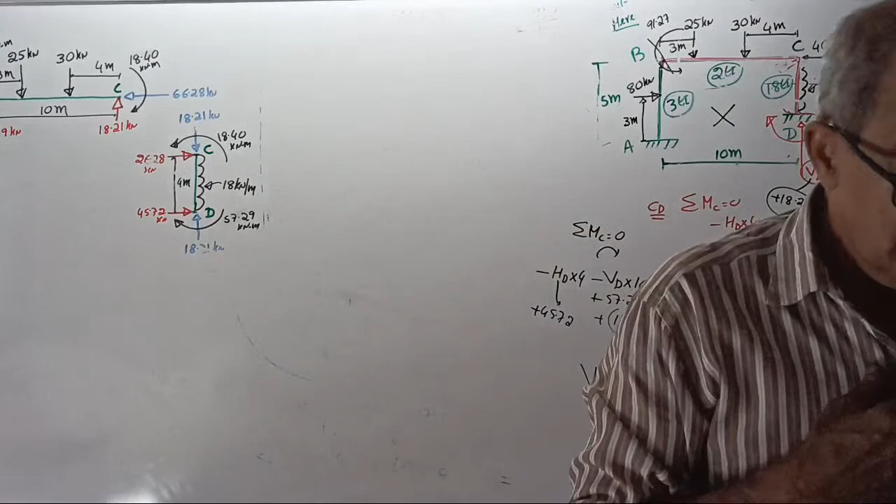Tell me, does the same answer come or not? If it is not coming, I will not continue the class. You comment whether the same answer comes, or the unwanted part. I just told you how you can play with the structure, how you can play, I will show it. Okay, I will take just 5 minutes break. You type whether the same answer comes or not. Only 5 minutes.

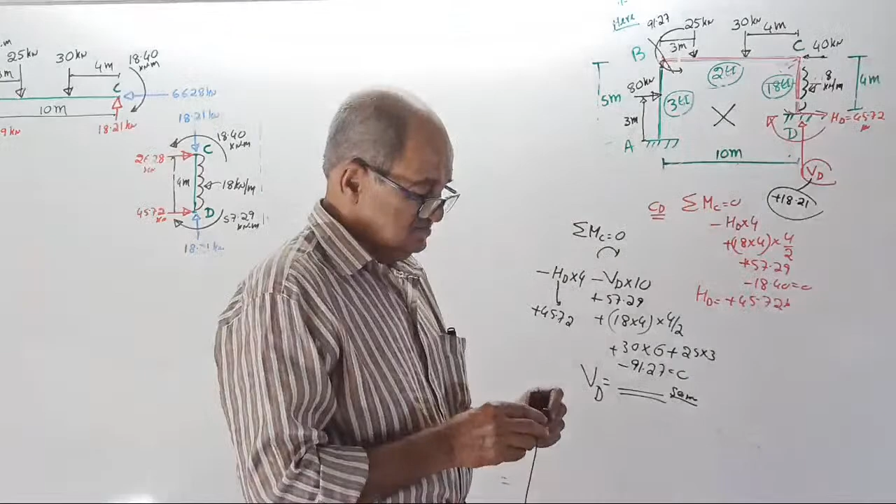Or if you consider first the free body of BA, take moment about B, get HA value. Once you get HA, you put VA here, take moment about that point, you are going to get VA equal to 36.79. Or you take free body of this member, take moment about C with this moment, again you are going to get VA equal to 36.79. My guarantee - there are so many ways of finding reaction.

No, anything - you got so many alternatives.

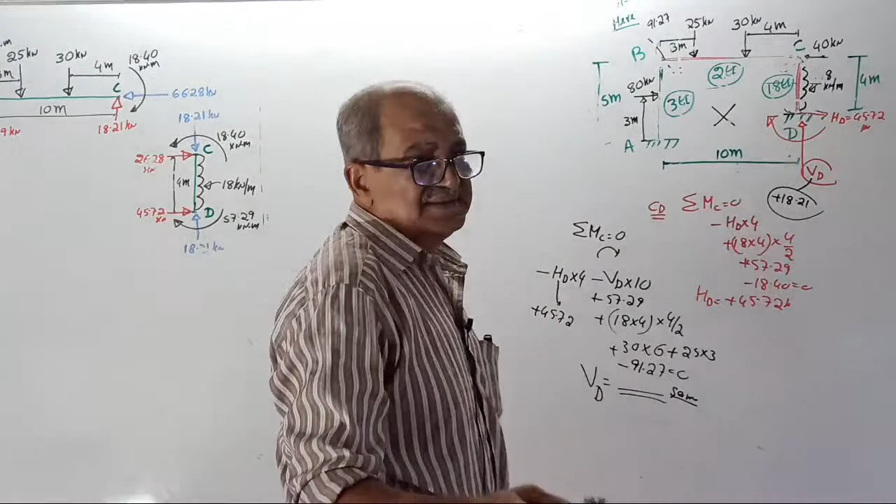Now, when I asked that question later, someone asked me earlier. I told him one more question - suppose there is a joint, you introduce a moment of 100. Imagine this gets 60, this gets 40. Same problem here - 100 outside, 60, 40 inside. Again no equilibrium, same as forces. Then somebody who knows the subject a little told me, sir, it is induced. I told him, tell me where is equilibrium, that's all I want. He said, sir, no equilibrium. What do you mean by no equilibrium? Then he said, sorry sir, leaving it.

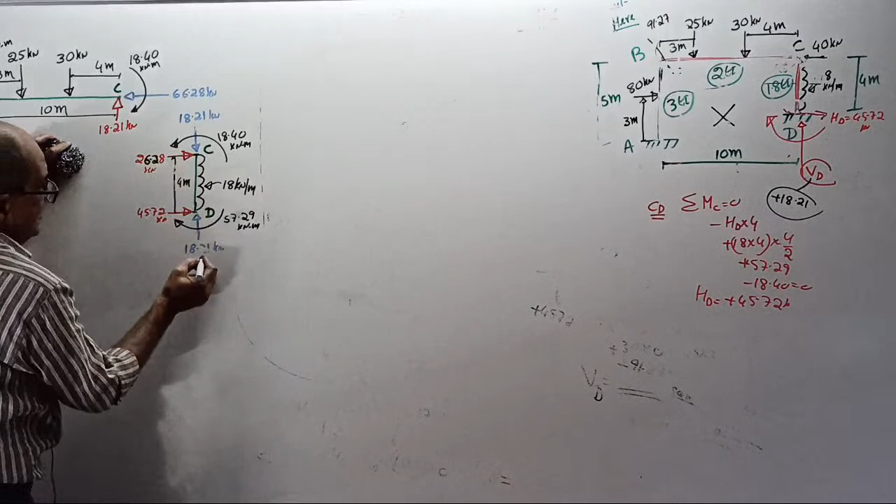Okay, anyway, all these I told just for fun. You correctly stick to what I told earlier. The numbers actually got rubbed out, so I am overwriting it here, therefore some color change will be there.

Okay, right, now I will go for diagrams. See what all results I got, I systematically entered there. Can you see the answer? Tell me, is all the answer fully visible?

Is the free body visible? Oh no, the camera turned a little. One minute. Is it fully visible now? What all results I got earlier, I made a neat diagram there - everything visible? Okay, that's all.

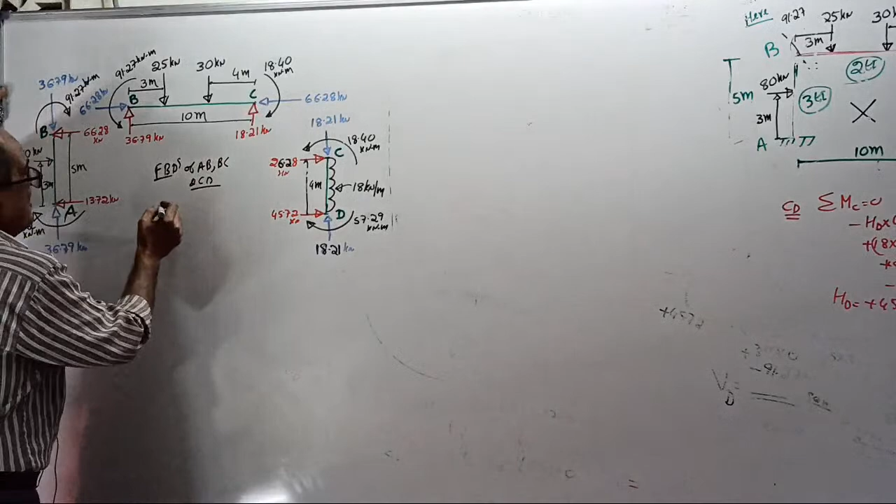Okay, I will start SFD and BMD now. See correctly, this is the free body diagrams of AB, BC and CD. Remember, all values are actual values, no sign convention - anything negative, we make reverse.

Now first, draw axial force diagram - it won't take much time. Common sense is sufficient to draw axial force diagram. This is the original member.

What you will do when you draw the axial force diagram - I will take values in kilonewton. I will take tension positive. Is some sign required? This question - tell me, all members are in what? Why take tension positive? All members are in what, axially? Tension or compression? Why take tension positive when all members are compression? So it is better to take compression positive.

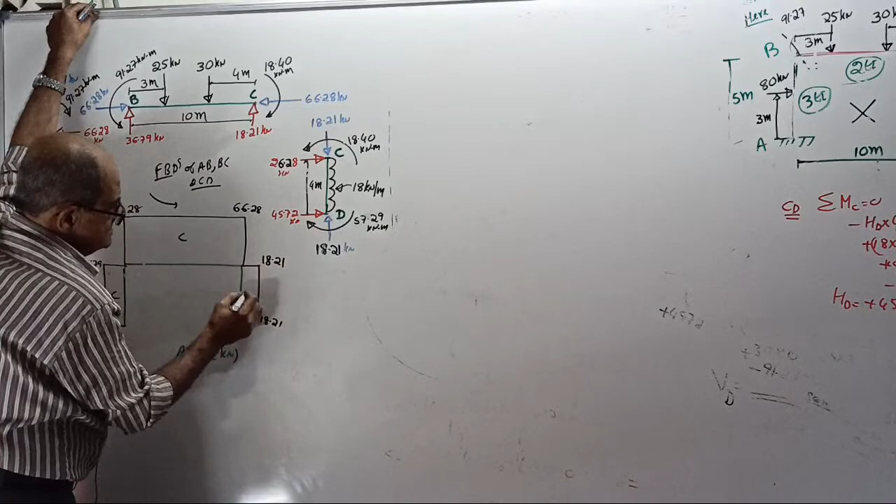So compression positive, or you can do one thing without sign. Tell me, for member AB, wherever you see, axial force is 36.79 compression, correct? Here also 36.79, it is compression. For this member, wherever you see, axial force is 66.28 compression - again compression. For this member also axial force is 18.21 compression. Suppose compression and tension both are there, you write C and T, or take tension positive.

Is axial force diagram clear? Past - any member, anywhere you see, it has got axial force of this value. Clear axial force diagram? I wrote it so let it be there - when you solve a problem, we should complete it. Axial force diagram clear? Okay, now draw shearing force diagram.

I will draw here. Shearing force diagram. Now remember, no gap now. Okay, this is shearing force diagram, all values are in kilonewton. See, start - sign you can decide later.

Okay start here, do one thing - start from here, this member. Go left by 13.72. No load up to here. Come right by how much - 80. So this value will be 66.28. No load up to there. Go again parallel to baseline, come back by 66.28. This is shearing force diagram for member AB.

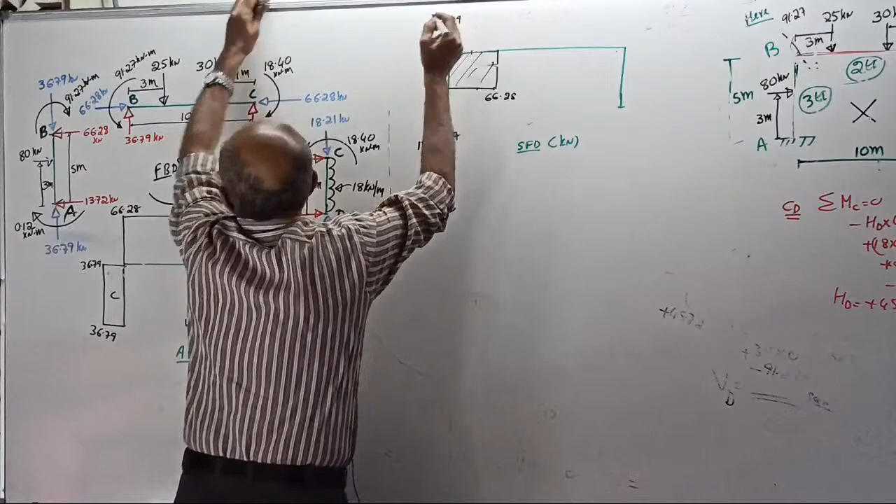You can take any one of them plus, other minus, based on some sign convention. Okay, not required. Go to BC - go up by 36.79. No load up to here for around 3 meters. Come down by 25, till a little value is left. How much?

You are not telling the answer, you are not telling. So I am calculating because you are not telling. If you had told the answer, it would have saved some time for me.

11.79. Then no load up to here. Come down by 30, it will come 18.21. No load up to here.

Go back. This is the shearing force diagram for the beam. One of them plus, other minus - that's your sign convention. Lastly, this member.

Continue from here, go right by 26.28. From here to here, come left by 18 into 4. It will cross the baseline here. When you reach here, it will be 45.72. This is the shearing force diagram.

This is the point where SFD crosses baseline for the column. This is the point where SFD changes sign for the beam. I want this distance - do you know how to get it?

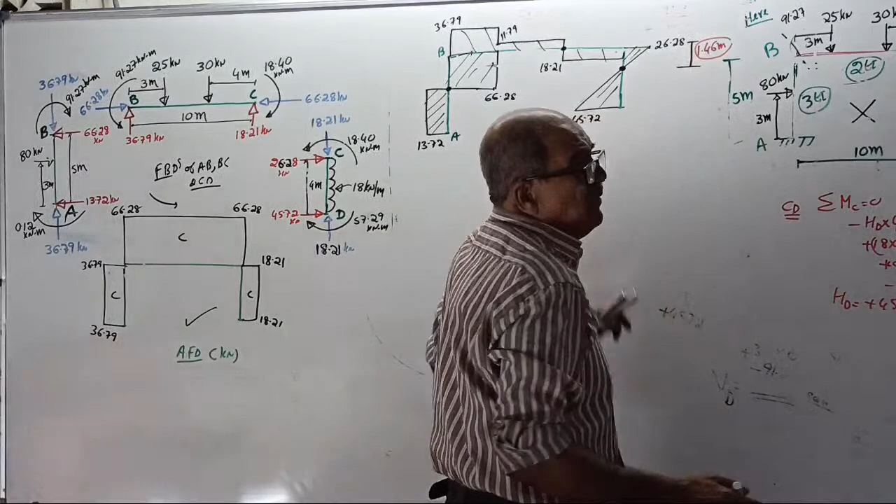After the class, I will call you. Please tell me how you got it. Can you help me? After the class, I may call you because I got some confusion. Can you help me after the class? After the class, I will call you. Can you kindly help me how you got it?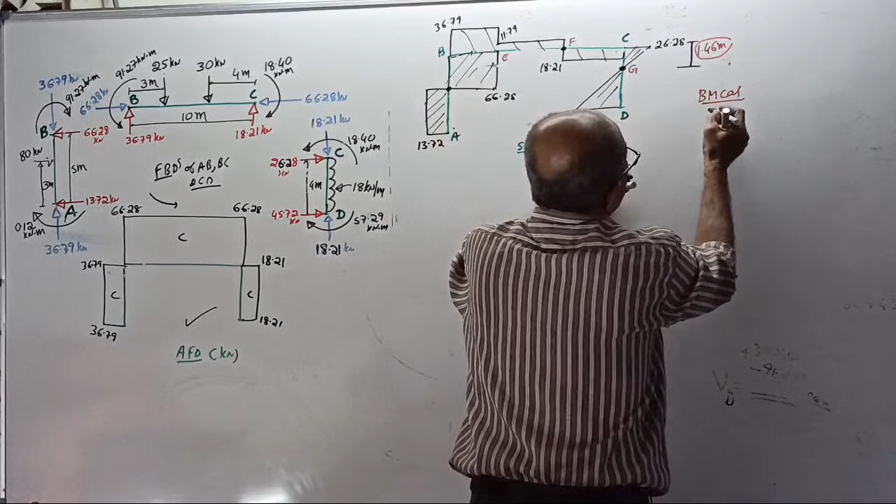Consider AB, consider AB. Now AB member, there is load this way. So I will take sagging positive this way. But remember, I will take sagging positive. Okay, start, correctly observe.

Bending moment at A is sagging plus 0.12. I'll explain - I will take for this member C, I will take what? Sagging positive this way positive. So BM at A plus 0.12.

BM at A is plus 0.12. BM at B equal to, it is hogging minus 91.27. These all I explained earlier. All calculations are in kilonewton meter.

Then BM at which point - this point, what is its name? There's an extra point, EFG, I will call this as H point. Okay, BM at H is here, see.

Plus 0.12, then plus 13.72 into 3, tell the answer. Plus 0.12 plus - this all I explained earlier.

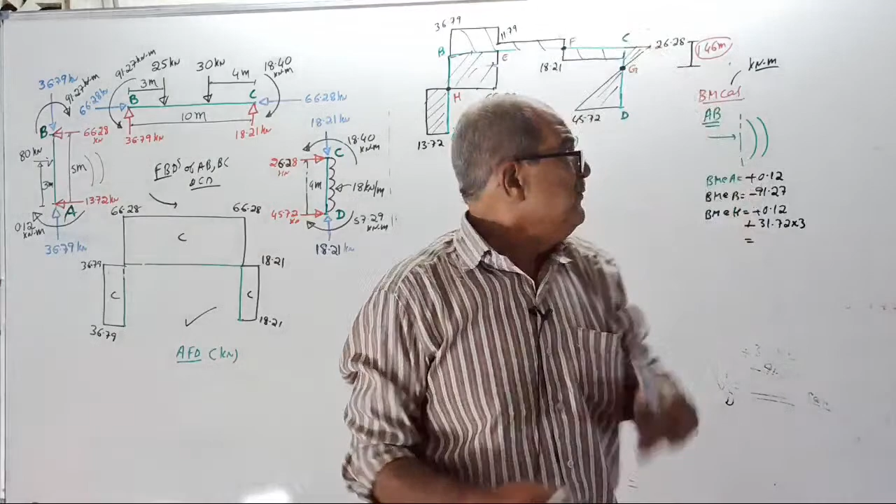Those people who got difficulty, refer to my earlier class on one frame, where the frame was like this. See, this type of frame I explained for you. You go back to that class and come back here.

Answer - don't lie, tell the answer fast. BM at H plus 41.28.

That means plus means it is sagging, minus means hogging, plus means sagging. Here tension is right side, tension is left side, tension is right side.

Therefore, when I draw BMD for that member, what will I do? Here I will plot 0.12 inside, very small value. And here I will plot 41.28 this side.

Here I will plot positive inside 41.28. Here tension is this side, minus 91.27. BMD will be like this.

If you want, this is BMD on tension side, no plus minus. Those who are regularly coming to my class, I explained everything. Newcomers, you have studied old classes. No sign - that is, this much portion is sagging, this is hogging. It should join to 0 here, 0.12 here.

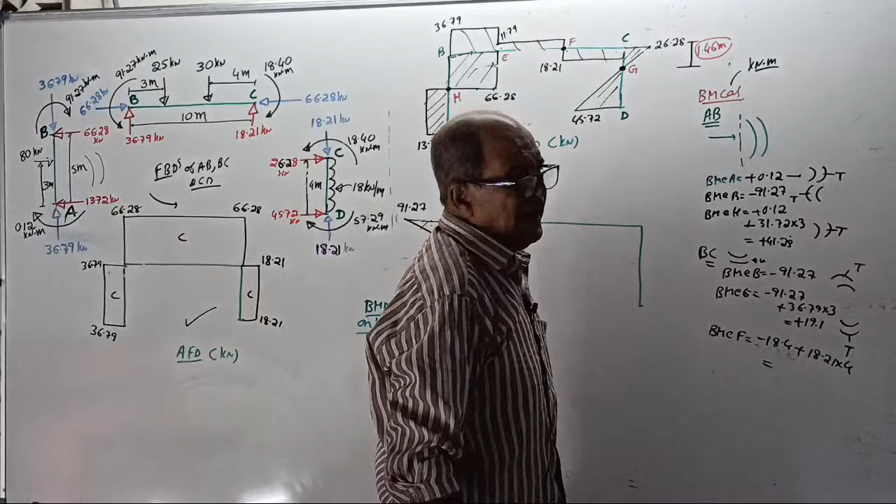Here, F, look this side. Minus 18.4 plus 18.21 into 4. Tell this answer fast, getting late. I am doing it little fast because I have given too much importance to free body. Answer: plus 54.44.

That means it is sagging, tension below. Lastly, bending moment at C is minus 18.4, means hogging, tension top. So here tension top of 91.27, here tension top of 18.4, somewhere under the first point load, 19.1 tension down, small value, and at 4 meters, 54.4 tension down. Therefore your BMD will be like this, BMD on tension side.

Lastly, member CD. Member CD is loaded like this. I will take sagging positive. This is sagging, okay. Bending moment at C: this is sagging, it is hogging, minus 18.4, means hogging tension right side.

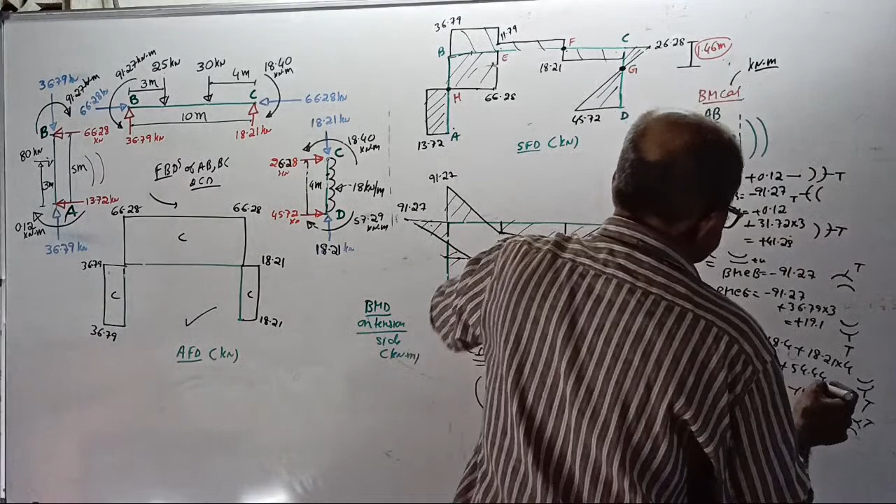Very small value, it is plus 0.78, plus means sagging tension inside. Very small value, 0.78. Your BMD will be this way. Okay, lift is not proper, adjust it. That point is here, at 1.46 meter.

Okay, it's a parabola, wait. This is 0.78. So there is a contraflexure point here, contraflexure here, contraflexure point. If you want, you can locate it. This is the BMD on tension side.

Now, just for those who want the superimposing principle, that is not actually correct. Only thing is, so many people know only how to draw BMD using the superimposing principle. I will draw it fast, without explaining. Let me remove this one. This is the correct BMD. For people who want the superimposing principle, I will tell what to do.

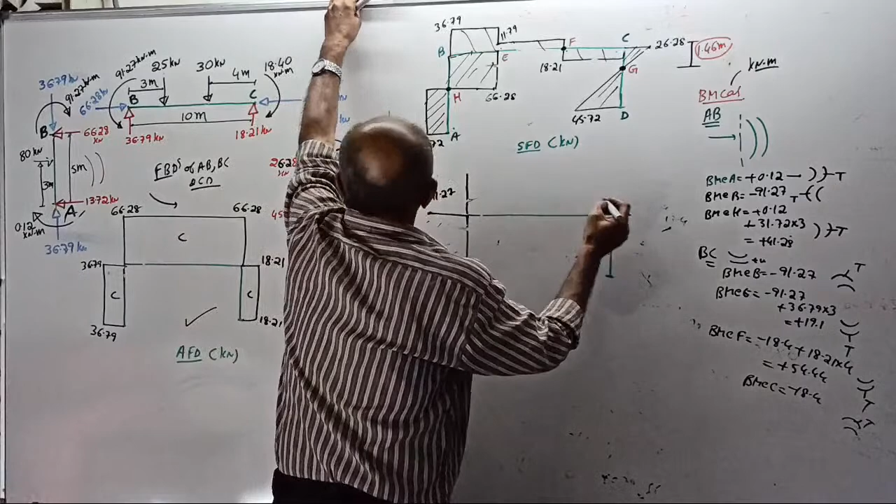Crude method: inside 0.12, plot on the tension side, outside 91.27, here outside, tension is outside. Crude method: 18.4, outside of 57 point something, rubbed out, 57 point something, joined by a straight line. Whatever load is given, joined by straight line.

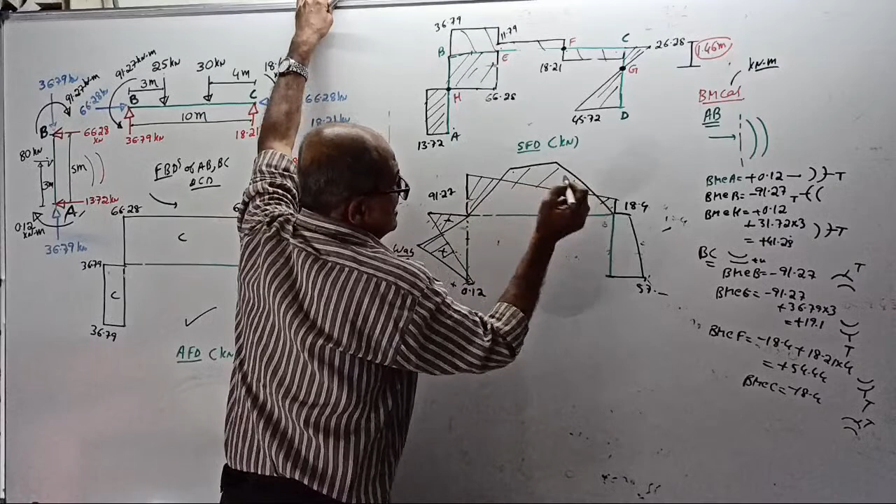Now superimpose the BMD for this member for a simply supported beam, WAB by L. Negative, positive, positive. Here, superimpose the BMD for a simply supported beam with 2 point loads. Draw it, you have to get it. Here, superimpose the BMD for UDL, small value will come, WL square by 8. Negative, positive, negative.

I don't want it because it is not correct, it is only from an academic point of view. Now, those who are coming for knowledge in my class, do not focus on this one. Now, axial force diagram, shear force diagram, bending moment diagram are fully clear. If it is clear, I will close the class.

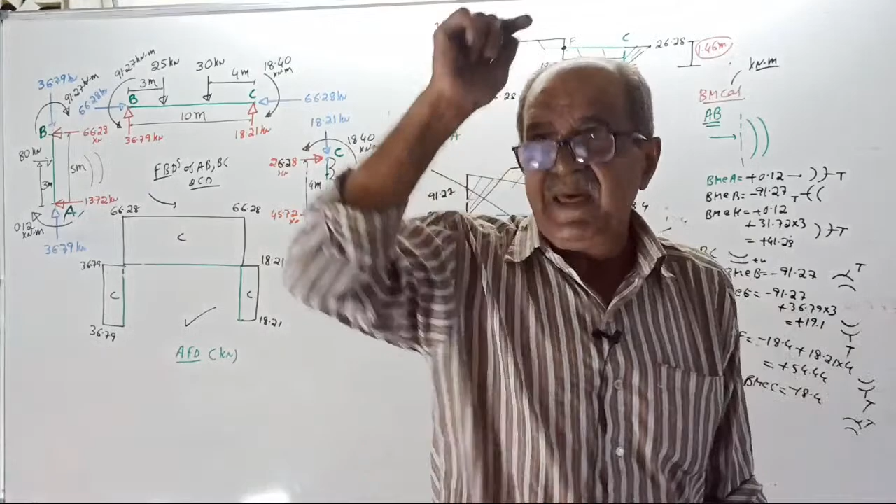Fully clear on bending moment diagram, remember. Sometimes a newcomer will suddenly come and say bending moment was explained properly or not explained properly. Go back to old classes. For frames, I explained bending moment diagrams earlier, after 3 members, a frame of 3 plus 5 member beam, a big frame, BMD drawn. Anybody who wants to learn from me should see all my classes, not like an entertainment video. Go through each and everything, make a note. That is strictly followed. My class is not for time pass purpose.